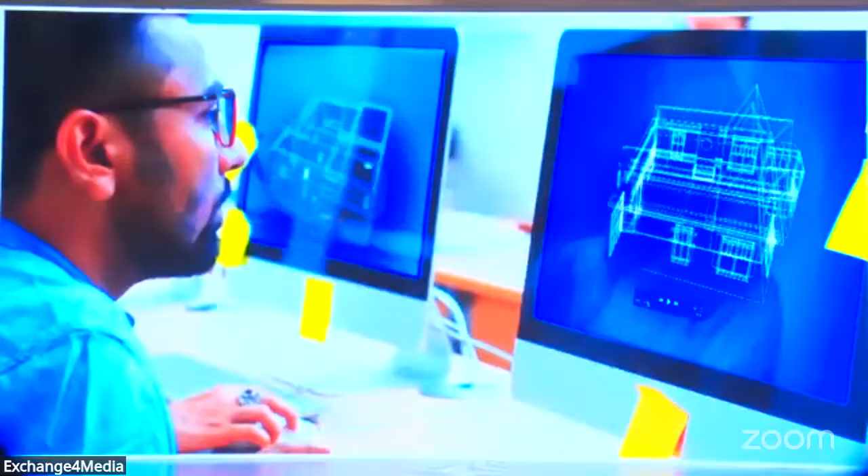As a country with the largest population in the world and an emerging superpower, India's development has been on a rapid rise. As with every growth story, this too is followed by unique challenges for the AEC industry. At Nemetschek, we have focused on the specific gaps and needs of the Indian market to create innovative software solutions.

As a global frontrunner focusing on the specific needs of the Indian market, we offer innovative software solutions that benefit every stakeholder for the entire AECO life cycle.

Several very prestigious projects in India were realized using Nemetschek solutions: Sangath Architect Studio, New Parliament Building, Abhikalpan Business Park, Rajkumari Ratnavati Girls School, Abhikalpan Skybay, Tagore Memorial Theatre, Ahmedabad Gufa.

As we shape the world in all dimensions, we have made it our mission to become the chosen and trusted partner of AECO and digital construction. Nemetschek is committed to delivering innovative solutions to meet every challenge and beyond. Be part of a new journey towards a better BIM solution, more cost-effective than your traditional tool.

Some people are born to show the world which path to choose in a crisis. Some brands are born to do the same. During times of challenge, the stalwarts of the Indian real estate industry have chosen to do just that, by showing others the way to finding opportunities even amidst a crisis, by showing the world how to go about delivering on promises even amidst adversity.

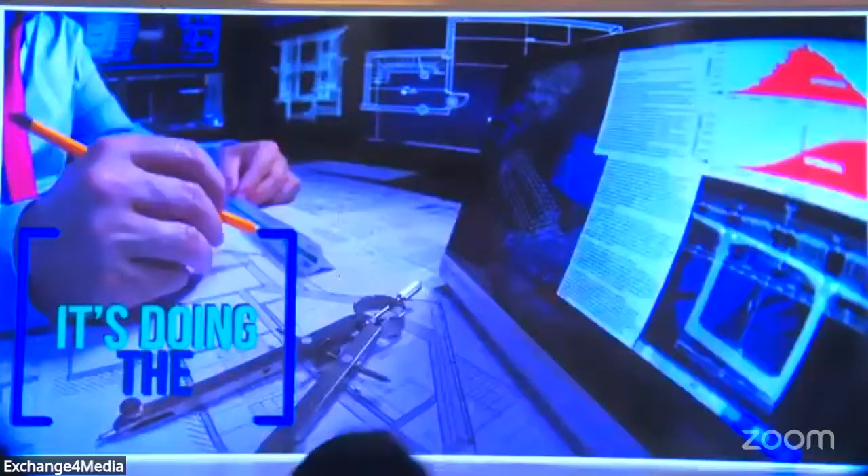Success doesn't just happen. It happens by design. By pushing the boundaries, by raising the bar. It takes days to develop a vision and nights to make it a reality. Knowing that pictures are worth 1,000 words and that every word makes a difference. It's doing the research, trusting your instinct, and finishing what you started.

For the past 20 years, Realty Plus has been turning obstacles into opportunities, keeping the industry informed on the latest developments, innovating to inspire debates and discussions, bringing forth the perspectives of industry leaders, honoring hard work and achievements, and keeping the industry connected.

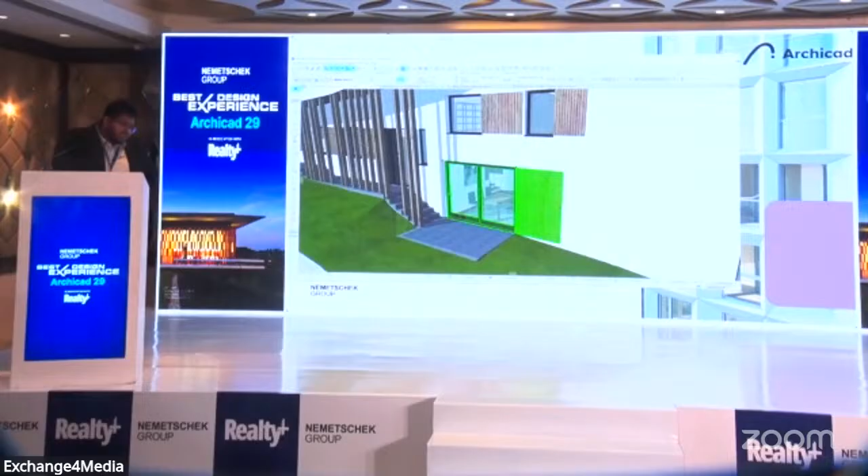To simply explain what Archicad is in a sentence, I would say it is a BIM authoring tool that helps us, the designers, architects, and engineers, create a model fed with all the information, and then we could use that model to extract the documentation we need, to collaborate with our team, internal or external, and produce data driven documents and collaboration. So that is where Archicad comes in, not just as a BIM authoring tool, but the best design tool out there.

I would say Archicad is BIM crafted by architects for architects. So what do we usually look for in a design tool today? We would like a software that will help us freely design something, that can help us visualize something, and importantly work in a collaborative environment with our teammates, and then document all these things. That is where Archicad comes in as a package, letting you do all of these things within the same environment, the same software. I'll be quickly diving into these four core pillars of a designer's workflow.

Archicad basically helps us design. It helps us tackle projects whatever the scale be—let it be a small residential project, or a high stacked project. That is where Archicad comes in with its strong user interface and intuitive guidelines, where people could quickly learn it, explore, and design, and that's where the user interface comes in handy.

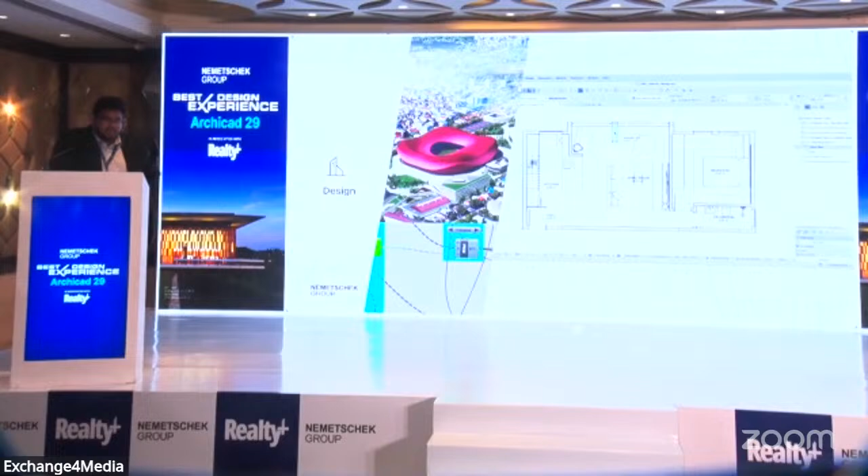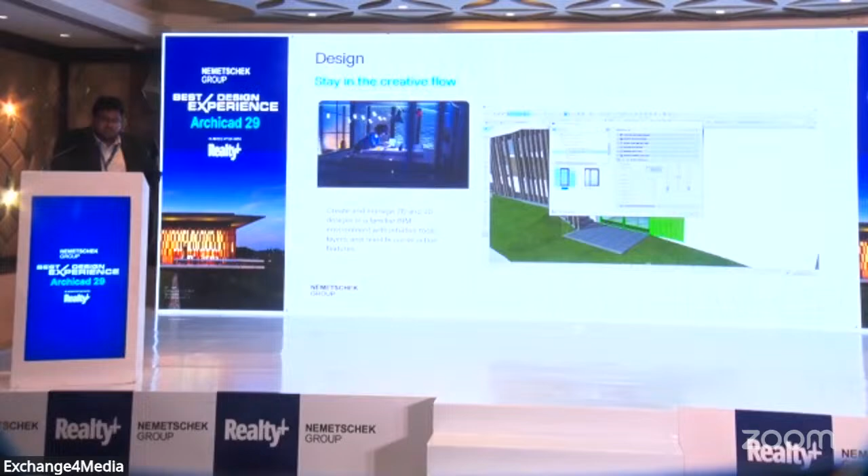Here we have the creative flow, where Archicad helps us create and manage 2D and 3D in one unanimous work environment, where we could simultaneously work on 2D and 3D, and design changes get reflected on both the spaces and onto the sheets we've exported, and the takeoffs we've taken from the drawing. This lets us focus more on the design aspects of our project, rather than jumping between views and changing designs here and there.

And there are tools like the curtain walls, the stair tools, the morph, and the shell tools. These tools help us create complex shapes, and help us bring our visions into life by modeling them. That is how Archicad also helps us create these complex elements.

We also have the collaboration between Rhino and Grasshopper to bring in some of the parametric part into Archicad. As we can see in today's design world, everything is parametric. We could see architects love learning parametric stuff—even during college, they learn Rhino and Grasshopper. So we Archicad people just thought, okay, you're good at it, let's bring that expertise into Archicad.

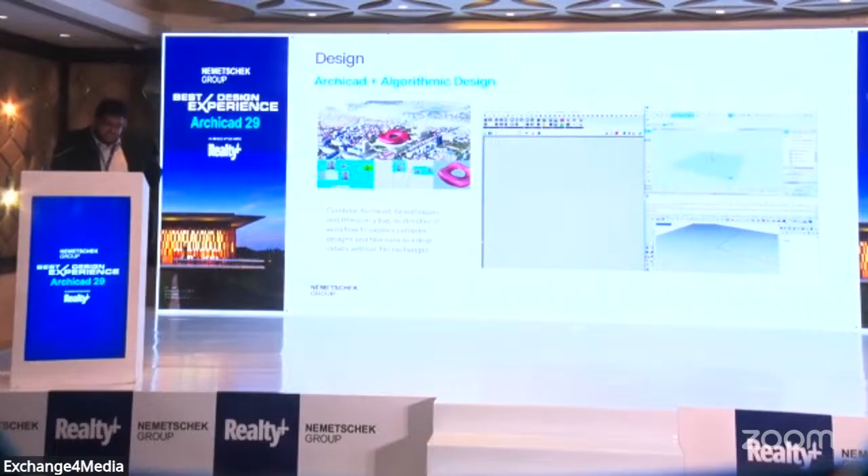So we have this plugin that lets you create complex shapes inside Rhino, and we use that plugin to convert those elements into BIM elements inside Archicad. This way you can have precision and control over your complicated shapes, and you can also get it parametric by controlling all these parameters.

One more design feature I would say is integrated design options. We all have this habit of creating multiple design options, naming them option number one, option number two, final one, and all that. That is where integrated design options comes in as a feature.

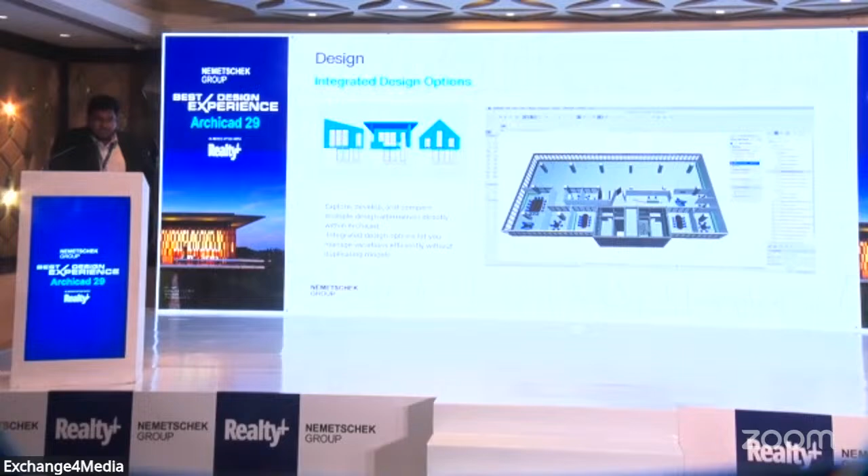I don't have to create duplicate files of all these different options, I could manage all these options within the same file itself. So I can have option A, option B, option C, and present it during my client presentation, and switch and juggle between these options. When the client goes with a certain option, we could delete all the other options and go with the final one. This helps us avoid juggling with different duplicated files and getting confused between ourselves about what we made in each of these files.

Let's move on to the visualization part. This is something very exciting for new users. Most of the softwares that we use today do not come with inbuilt rendering engines. So we start with a 2D workflow, bring it into a 3D software, build 3D structures, and then move on to another software to make renders of these things. That is where Archicad comes in with two inbuilt rendering engines.

One is Cinema 4D from Maxon, and one is Redshift. So you get the option to create your own renders based on these rendering engines. This will help you create your renders at the initial stage itself, while selecting your surfaces or materials, instead of having to go to your visualization team.

Archicad can also help you create certain animations and visualization aspects like walkthroughs and fly-throughs. You can simulate real-time sun path and shadow into your building just by giving in the latitude and longitude information. Archicad can simulate the real-time sun path into the site, and we can generate the shadows and the sun path through the openings in our buildings. This can again come in handy when we are trying to impress our clients, right? We just don't do walls and paint them, we do a lot of study before designing all these buildings.

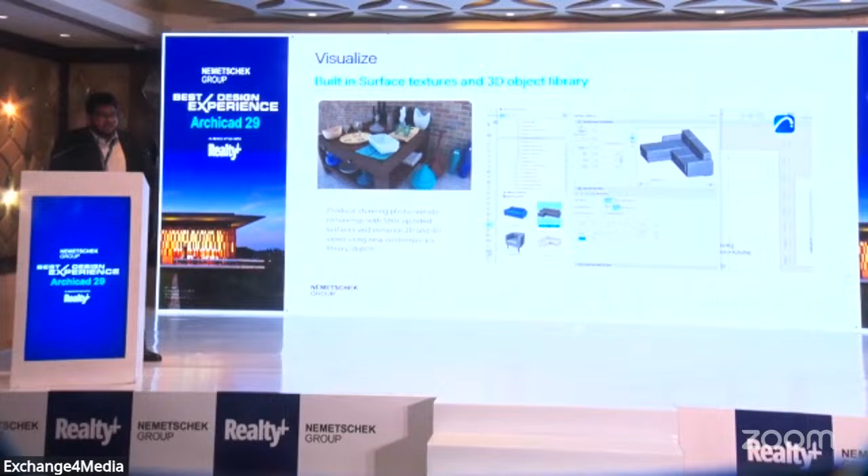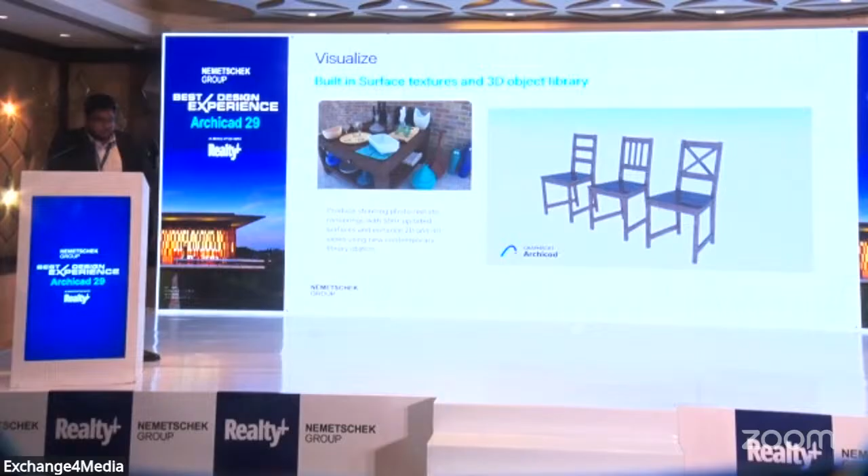We do have an inbuilt vast library of surfaces and parametric objects, and we could also bring in objects from any other 3D resources, like Rhino objects or SketchUp objects. But the objects inside Archicad I would call smart parametric objects. As you can see, these objects can be quickly adjusted, let's say a three-seater sofa made into a two-seater sofa or an L-shaped sofa just by adjusting these parameters. We can also create these objects by doing a little bit of GDL coding, and get all the elements within Archicad just by drag and dropping it inside.

We all like to work with the latest stuff on the internet today, like Enscape and D5. People are making realistic renders these days. When I was in college, I used to do Twinmotion, Lumion, it used to be so glossy, right? Now these softwares let you bring external elements into Archicad, and we all know the struggle of moving these elements inside rendering softwares. That is where with Enscape, you can bring all these elements into Archicad. It is bidirectional and live.

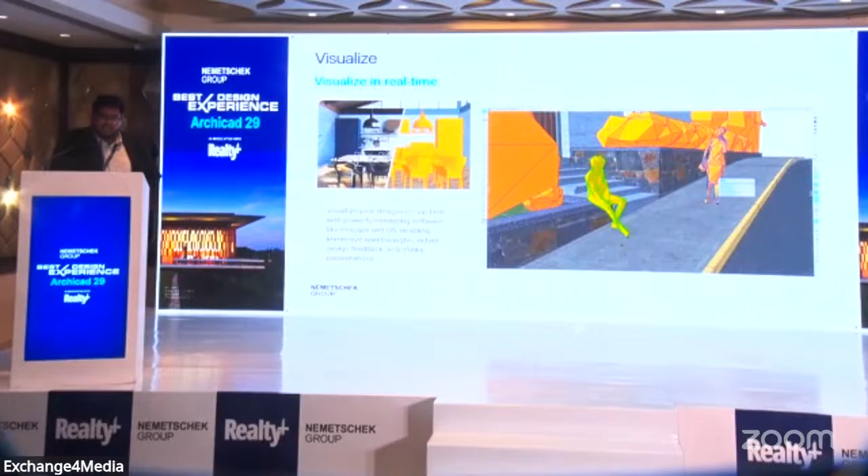For example, if we have a design team and a visualization team sitting in our own office, we could still connect it live, make those changes in design, and still get those renders. We don't have to export it, bring it back to the design team, and get another export. That kind of live rendering and walkthrough is possible with today's technologies like Enscape and D5.

BIMX is one of the greatest features, I would say, in the visualization part of Archicad. People use it for different purposes, but for me, I use BIMX to showcase my designs and brag about my designs with my friends. So BIMX I would call BIM on the go.

You can put your entire BIM project, your model, your documentation all together into a format called BIMX hypermodel, and then put the model into your smartphone and carry it everywhere. You can even put it on a cloud drive, share the link with your clients, and your clients can open that link on a browser and see your models, the sections, details, and all that you have generated.

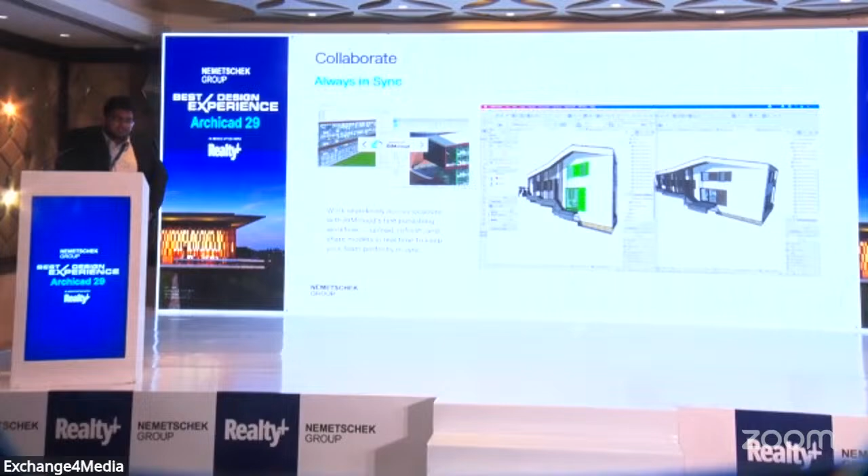Let's say if I am working away from my office, I'll download the file from the BIM Cloud, and then I'll start working from my personal computer.

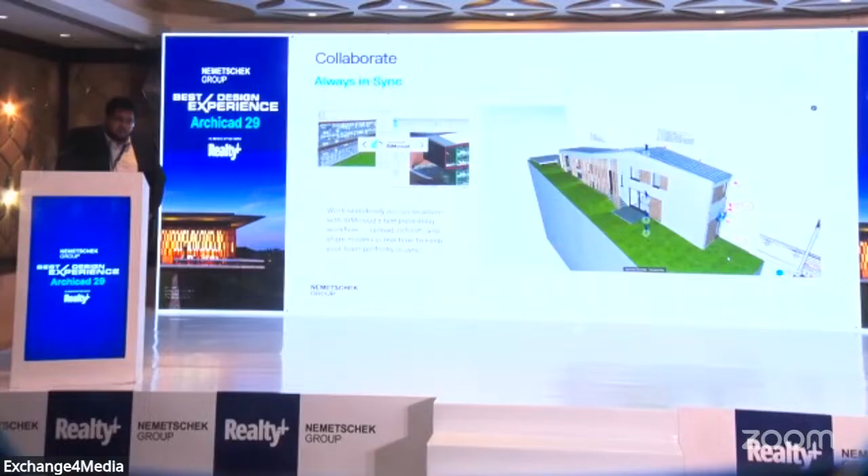There is one more function with BIM Cloud called Teamwork. I can share my project in BIM Cloud with my colleagues, so even if I'm not geographically in the same location with my team, I could still work on the same project with them at the same time. We can communicate within the file, and I can assign something to my colleague and ask him to change it or do it. So that is how BIM Cloud helps us with collaboration within internal teams as well as external teams.

And integration within Archicad. To talk about integration, Archicad can seamlessly work with some of the software I mentioned here. If you want to do certain clash detections or rule-based checkups, you can put it on Solibri, and then you can do all these things.

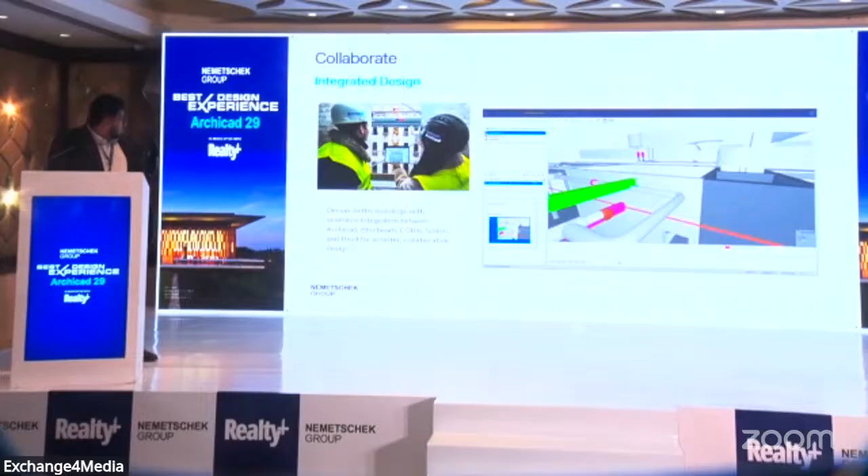If you want to collaborate your projects and push all your documents into Bluebeam, and if you want your team to sit and review those PDFs, you can push it into Bluebeam. And you can work with your partners who are working with Revit, bringing their Revit models in as reference. So that is how integration comes in as an internal part within Archicad.

More on integration, I'd like to talk a little bit about OpenBIM. To simply explain it, say I'm working on a Word document or an Excel document, and I want to share that file with a colleague or someone I'm collaborating with. I would share it in a format called PDF, because I don't want them to edit my Excel or Word file directly.

So IFC is the format where I would save my BIM model, and then share it with my colleagues, contractors, or consultants. They could use that IFC file as a reference to build their BIM model, whatever their preferred BIM software is — Archicad, Revit, Allplan, or Vectorworks. Then they'll give me back their IFC files, which I can link and use as a reference to build my own project. That is how IFC works within the OpenBIM concept.

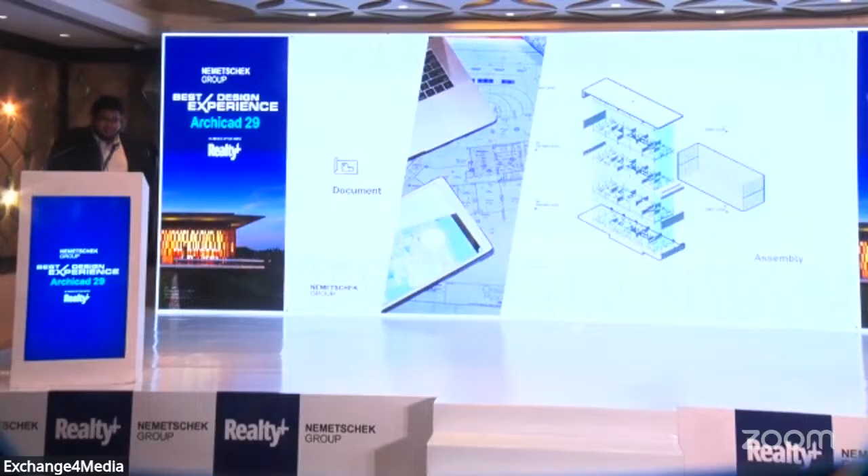And finally, the documentation part. I personally like to design a lot and hate the documentation part where you sit and create details and all that. That's where Archicad comes in and helps you focus on the design, taking care of the paperwork part of your drawings.

Within Archicad, we have this out-of-the-box documentation system. All these drawings are generated because we built a 3D model, and from that model we have fed in all the information. We cut that 3D model horizontally and vertically, which gives us the drawings—our sections, elevations, and plans. These sections and plans already have all the information because we fed it in while building the model.

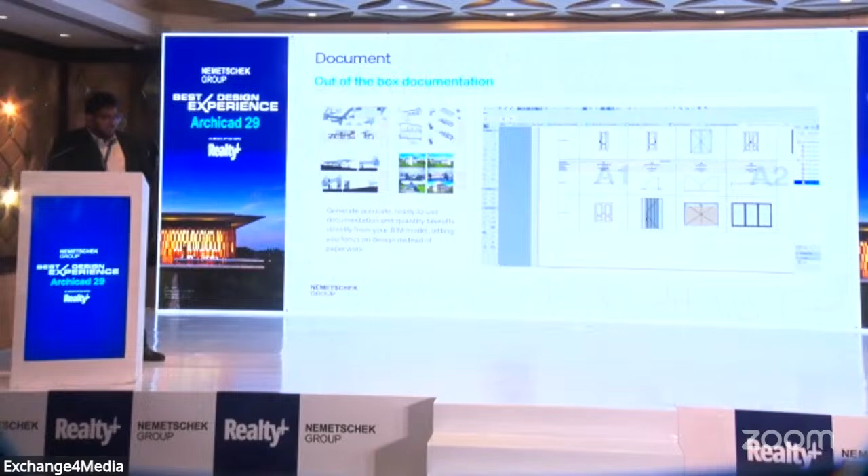I could quickly control these views by adding or adjusting my layers. I decide what I need in my view, then turn off the things I know I don't need. I also have more control with model view options—I can decide what level of detail I need in an element. For example, if I want to show just my door opening and not a door, I can do that without changing the door itself; I just switch the model view options. If I want to show a fully detailed door with the leaf and everything, I can switch it back without going to change the door setting. I can set all this up and then quickly juggle between options to create what I want to see in my drawing or documentation.

Once I create all the documentation, I put it on sheets and just click publish. With a single click, all these drawings get extracted into the desired format—let it be PDF or DWG. With that single click, all the drawings go and sit in the folder we've created, or we could even put it directly on the cloud. We can do all these things here.

The main part is when there's a design change—I make changes on the design, then come back to the publisher set and click update, and all the changes I've made get automatically updated on the documentation. That's where most of the time saving happens.

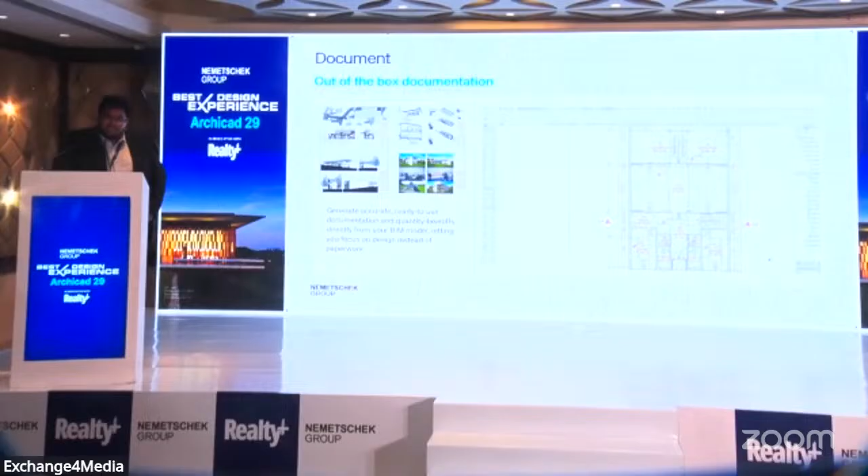To talk about accuracy and credibility, since most of the information is already fed in, if I want to give annotations, I don't have to label my wall as a wall, because Archicad already knows it's a wall—that's how I made it. I click on label, then click on my wall, and it creates: this is wall number 1, this is the material it's made of, and all the information I wanted on that label is there. It also works with levels, annotations, and dimensions. Since it's built up this way, I just click all the points and drag, and my annotations are done.

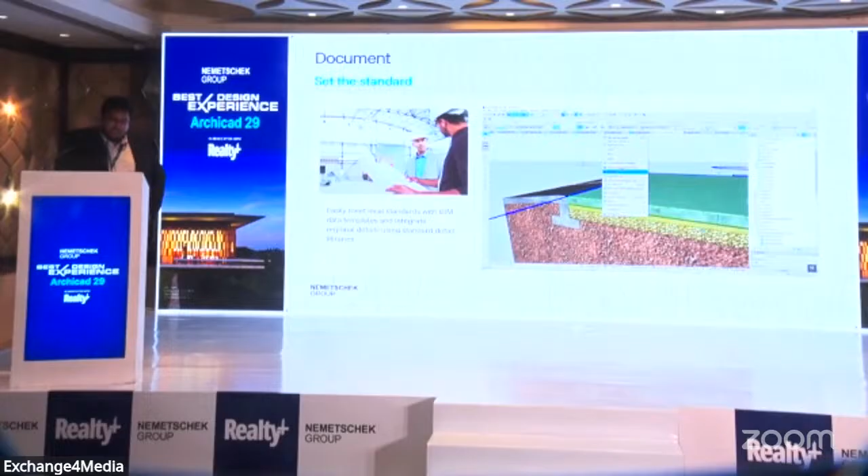Again, setting up the standard with documentation—some of this might sound like a lot of settings here and there, and it is, that's how BIM works. Once we do all these settings, we can put all of this into a template and use it across all our other projects. Once we're done with a project, having made a lot of changes to design elements and annotations—because every architecture firm has a standard, a drawing template, an office standard—we can put all these things into the Archicad template and throw it onto different projects, then straight away start working once the template is created.

There's supposed to be a nice music playing along. It's okay.

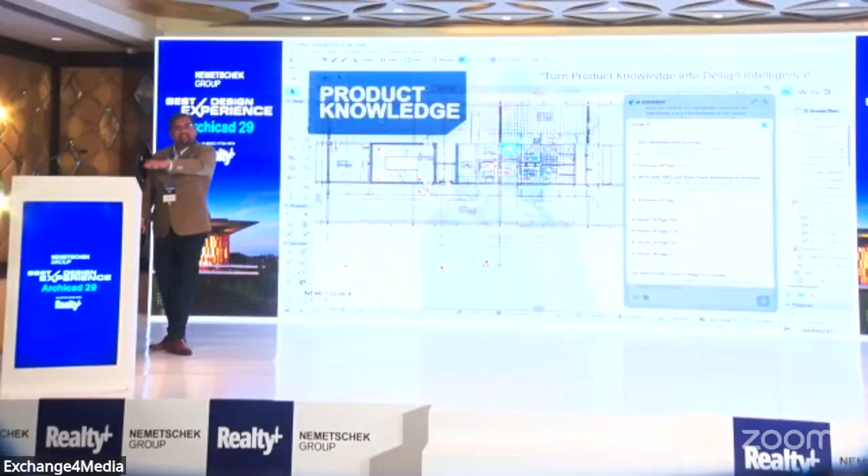So all your queries can solve instantly. You're gonna have all those features inbuilt inside your software. I know architects work late, and they want something at 2-3 a.m. We built a friend for you which can at least give you some answers, immediate response through an AI system. It's inbuilt inside, so it knows your product knowledge, and you can deep dive into that.

Second thing is your readability check. It's always difficult - we are humans, we tend to make mistakes. Often there is an overlap, like if you add a dimension, it automatically overlaps with the text. You can actually proof check this through your AI assistant. We want your creativity to focus on building your own designs, your aspects, your design thinking. Let the AI system worry about the documentation.

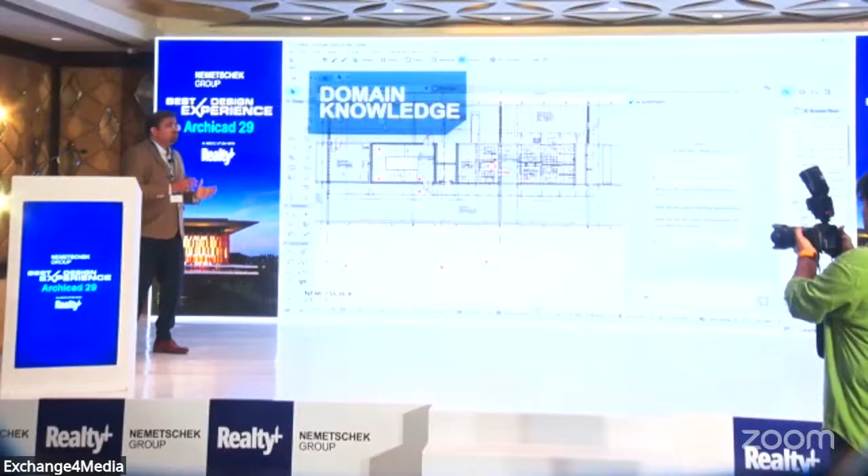Then domain knowledge - it knows your whole domain, like regulations, minimum space required for fire norms, all this. Why do you need to switch to a different Google? You can directly ask it. There is a Gemini engine inside here which can give you more exact insight about what you want.

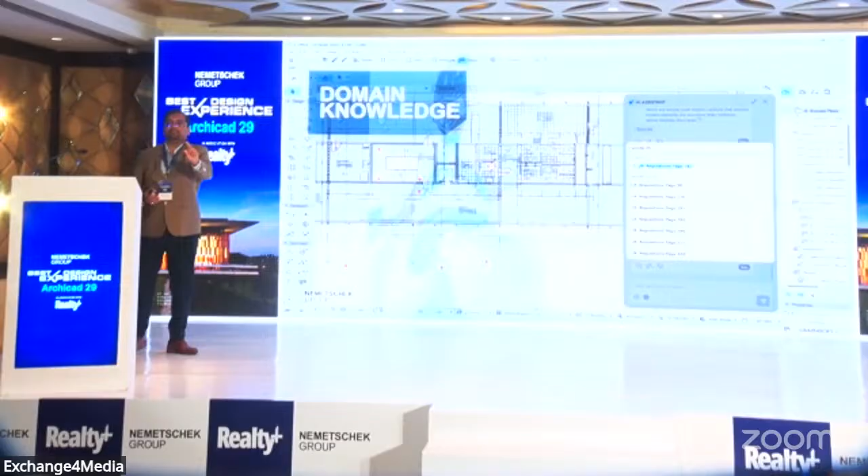So while designing, we are trying to change the whole design concept where data-driven design can also work. You always get this question like, how much should I have this, am I having this? Let's have a cross check with this. Let AI assistant help you in that. So you build it right, precise, smarter, deeper, bolder.

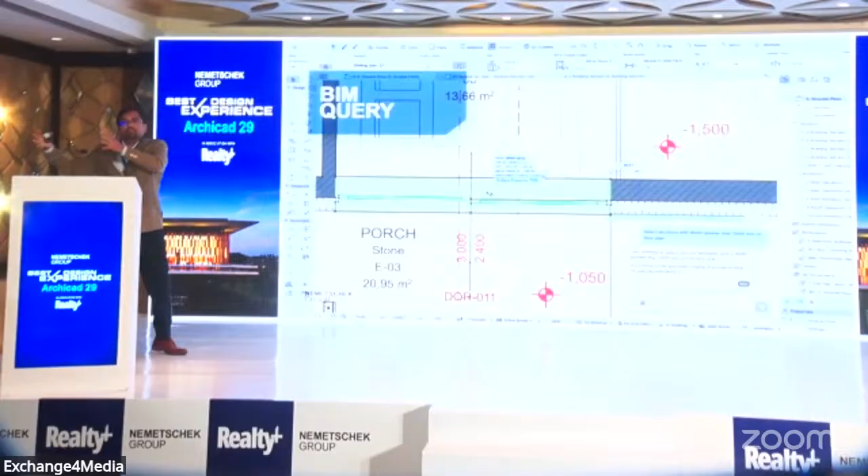Then BIM queries - you tend to get queries like, how many doors do I have, with so much and so much dimension. You're gonna ask it, and it will give it to you. When we say BIM, the 'I' is very important - information is very crucial, and you can literally play with that.

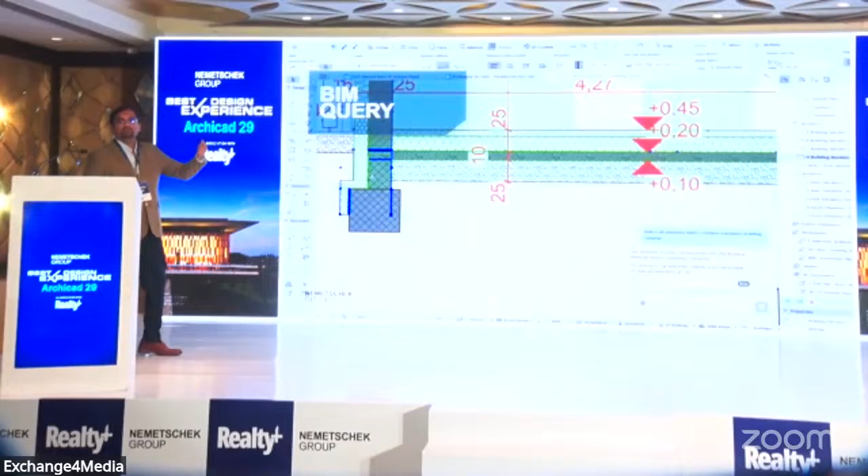Build your model, play with your information. So tomorrow, if a client asks you a question, you can immediately answer precisely, instantly, directly. That's what the AI assistant does for you. That's why we are building a new ecosystem, a cutting edge innovation, so that you get the best design experience.

AI visualizer - you already know that, you already explored that. Instantly it gives you at least 10 different options, and you can choose from those to work on your design. So it already saves you time, but now AI assistant and AI visualizer are combined together. Just add your prompt, say 'I am visualizing this' or 'I want this visualization,' and it will give you instant results, saving a lot of time.

With a client you need to discuss something you don't know yet - as architects, designers, engineers, you don't know what you're building or how. So you can build a very early stage design, maybe through AI, then verify it, and then further precisely do the documentation for it. Saves your time, right?

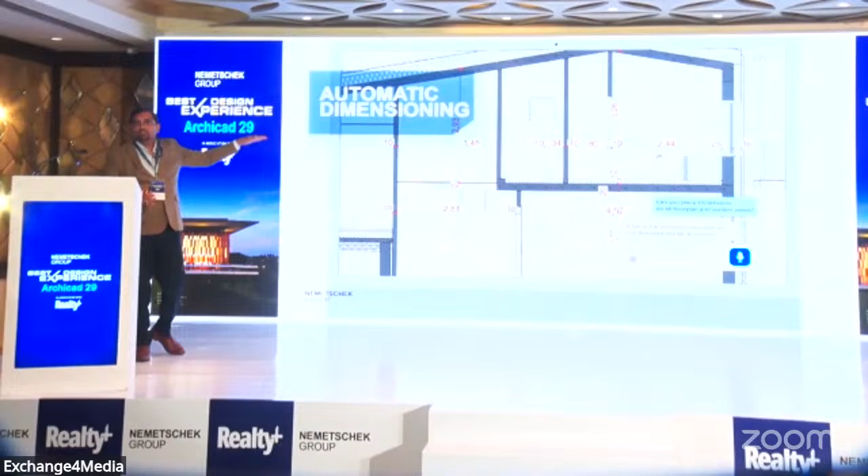Then there are precise documentation tools, where through the AI assistant you can ask for auto dimension. Just say dimension the floor, or dimension a certain part of it, and it will do the dimension for you. So you can focus on your own concept, your creativity, your space requirements, and all those things - focus on designing the best experience.

Even labeling is sometimes a very painful job - you have to make sure you label it right there or not. So you can also add smart labeling tools and work along with your own design concepts. Leave the documentation to the AI assistant. This is still a beta version, and going forward it's going to get better, letting you work much faster, much better, and exactly how you intended for your client.

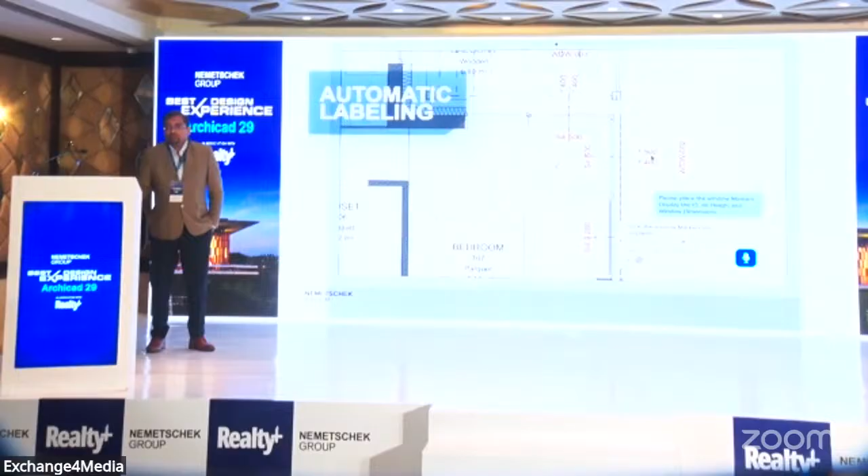So as we've covered the AI tools, I'm going to talk about some of the new standalone licenses which we have started - the MEP designer.

We thought that when we say designers, the MEP part is still missing. With this 29 MEP Designer launch, you can now start complete design of the whole MEP systems - your ducting, your piping, all part of it. You can build it here, and not just like building in CAD software - this is more intuitive sketching, same like the Archicad experience you had, inside your software, and you can just build it, sketch it. Even Mac users can now be MEP designers, and I think this is a big leap, right?

Architects used to enjoy that Mac feel and working on that. Why not MEP designers? Now you're going to have it. So I think this is one of the great leaps which we're going to have, and I'm going to quickly show you a video, and then we're going to discuss more into those features as well. Let me play the video.

Hope the music will work. Yeah, it's working.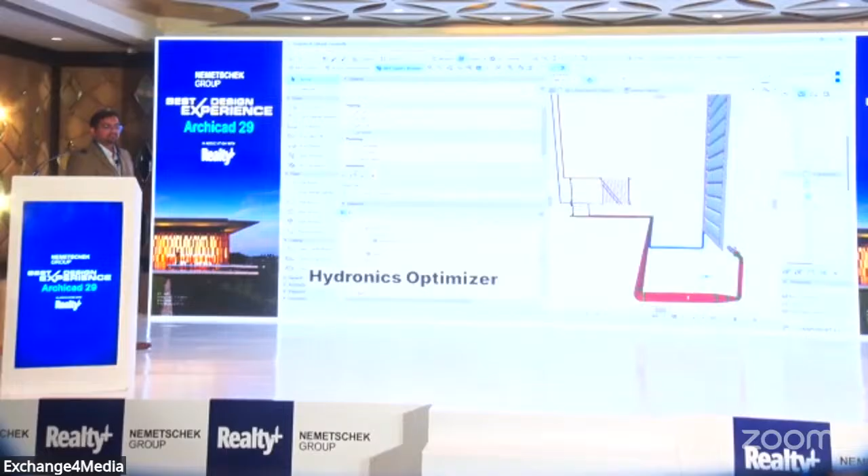Hope you liked it. So all this experience which you saw, like what you do build in Archicad, you're going to have it inside the MEP designer, and that's a standalone license for the MEP users and all those things. So let's deep dive into each feature.

So it's a powerful, effortless MEP modeling which you can do, where you can draw all your piping, ducting, all fire requirements, however like a sketch - intuitive sketching in 2D and 3D, and that's effective enough. However you draw it in Archicad, just follow the command and it will follow it. You can even do clash detection and collision detection inside this, where while designing in your early stage, you can find out, okay, among the fire and among the duct, how you can coordinate among there as well.

So it's early stage quick clash detection, as well as there's direct integration with Solibri, so that you can find detailed clash detection and a BCF tool, collaboration platform together as well. So it's powerful clash detection in early stage, as well as effortless modeling in MEP in all kinds of systems. We believe MEP is more like breathing for the building, and that's what we are providing - an intuitive software solution for them as well.

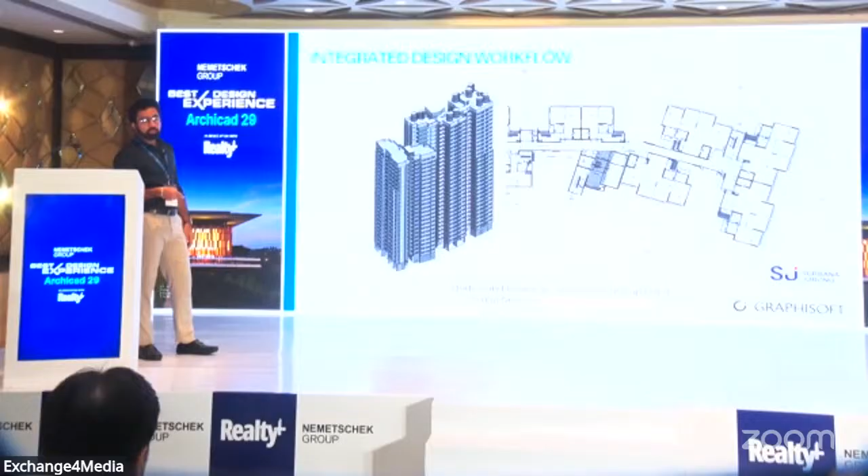The documentation for all the disciplines is live, as I told earlier, so it's a single source of truth. Whatever changes you make in any of the models, documentation in the other disciplines also gets updated.

As mentioned in the previous presentation, BIM Cloud allows you to work from anywhere. So you can have team members joining from anywhere around the world on the teamwork project and collaborating together. This opens up the opportunity of working with architects from other countries as well.

For coordination, if there are any issues within the model, the modelers will be able to spot it in real time and send a message across to the team members responsible for resolving those issues. So there is no separate coordination that needs to be done—it can be done while modeling, by the modelers themselves. So there is no coordinator required in this workflow.

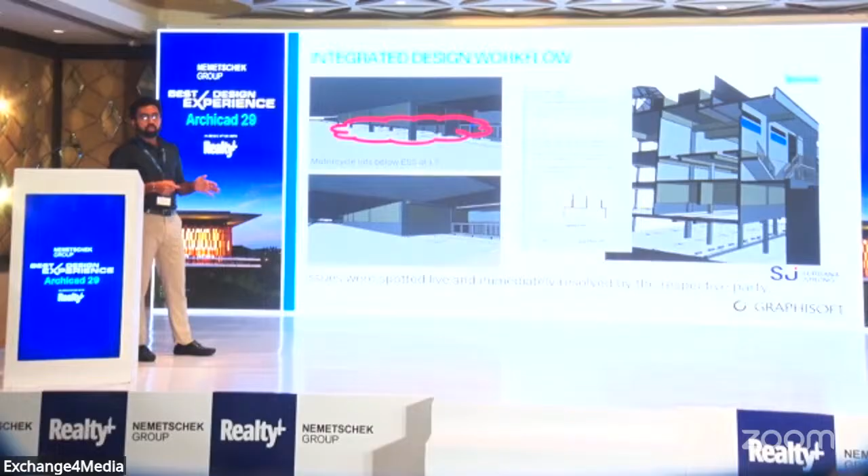Having seen the advantages of this workflow, I'm going to show the timeline required for the traditional workflow. The architectural team starts the modeling, and after a point the C&S team, the civil and structural team, gets that file and starts their modeling. After another set of time, the MEP engineering team joins and creates their modeling. During this tender stage, coordination happens all the way across, and they generate this federated model until the issues are resolved.

But with this new one integrated model approach, the architectural and structural team work on the same model right from the beginning, and coordination happens in parallel along with the modeling by the modelers. After a point, the file can be linked to the MEP model, so the MEP engineering team can develop their model, and their coordination also happens in parallel while they do the modeling. So there is no separate coordination happening, and the resource for the coordinator is also exempted in this workflow.

So this saves almost two months of time for a multi-story building project for Surbana Jurong. This is actually the result of a case study that we did together with Surbana Jurong.

We also have TeamBuild Construction, which is also using Archicad. The earlier Surbana Jurong was a design consultant, and TeamBuild is actually a construction company. They have also adopted the same workflow during the construction stage of their project. They have Archicad for architectural, structural, and MEP, but they are producing drawings for the construction stage.

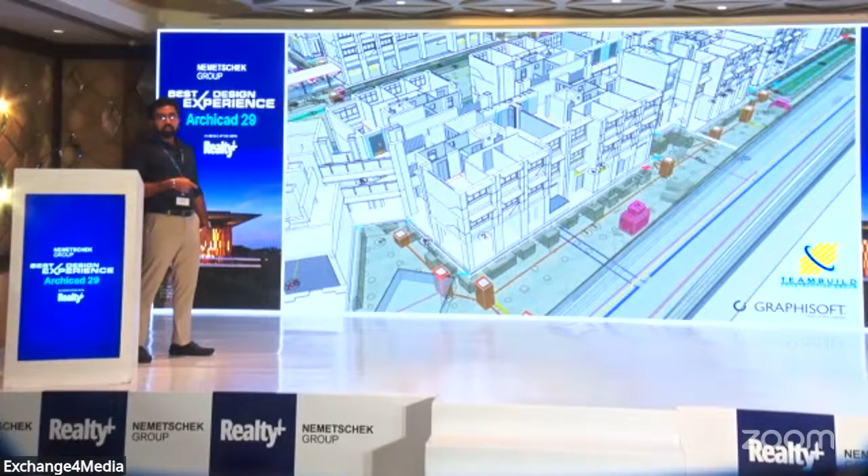There are manholes, inspection chambers, civil works - everything being done within the same Archicad file, and they are able to produce documentation at the construction level detail within Archicad. They are using the same approach where architectural and structural teams work on the same file, and then this file is linked to the MEP project, and then the MEP model is created.

They are able to publish their work in Enscape as a virtual mockup. Back in the day, if they do HDB projects in Singapore, they have to create a real mockup so that it will be displayed in the HDB office, so buyers can come in and view the mockup and then buy it. But now what they are doing is they have moved digitally.

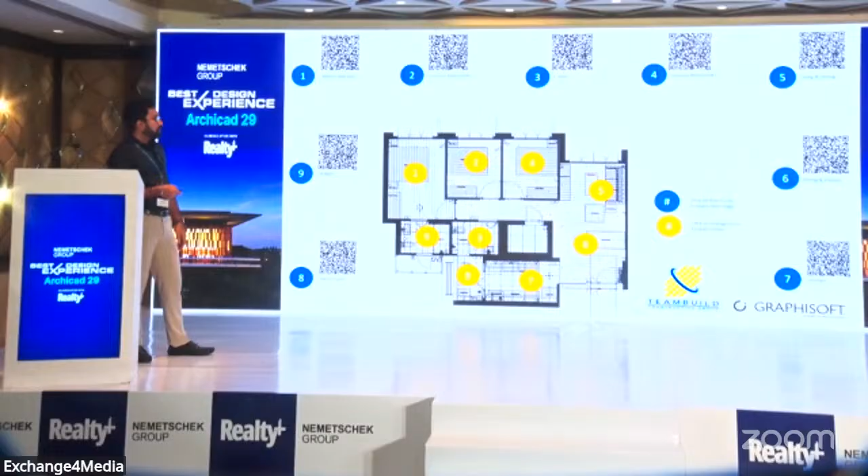They have exported the Archicad project into Enscape, and then they are able to view it on their mobile phone. Here I'm showing this QR code - if you scan it, you will be able to go inside the model and check the details of information that they have put inside the models there. I'll pause here for a few seconds. If you are not scanning, I'll also show the video of what it will be in the next slide.

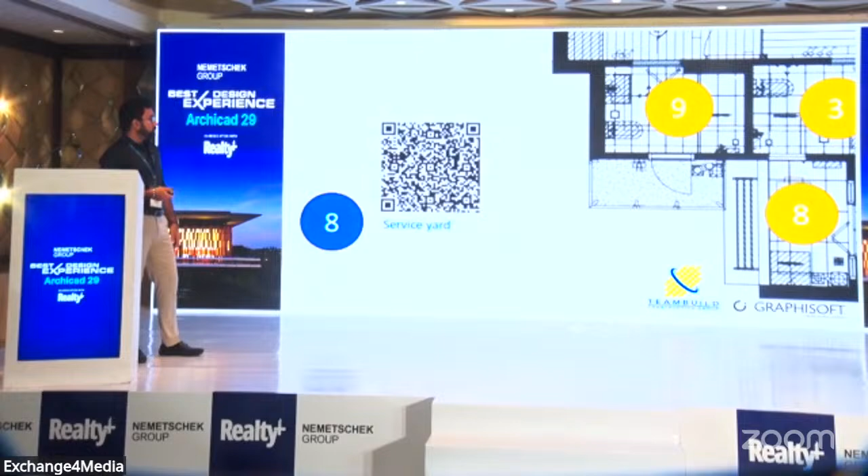Once you scan this QR code, it will ask you to allow access to the gyroscope. If your mobile phone has a gyroscope, the motion sensor, you'll be able to allow it, and then you can go inside the model. You can see the detail of information that they have put inside the model. They have done the markups, the markings of dimensions in 3D itself, and they have also modeled all the MEP tools to the greatest detail. You can see even the furnishing, lighting - everything is there.

If you closely watch these tiles here, they have even drawn or created the 1 mm groove between the tiles. That is how detailed they have made the drawings and the model. So Archicad is able to support all these workflows natively.

Having seen the one integrated model approach, let us take a look at data-driven design. For data-driven design, we are using dRofus, and then we are also using BIMx. I'll show how BIMx helps in accessing the information from dRofus. For people who are new to dRofus, I'll give a short explanation of what it is.

dRofus is a data management tool, meaning it is kind of a database where you can plan all the design requirements. If you're meeting the client for the first time, you can add all the specifications that they give into this digital tool, which helps you do the design. This is a planning tool where you have all the design details, specifications, and requirements captured within this environment, and this has a direct connection with Archicad. You will be able to use this information inside Archicad to complete your design. Anytime you'll be able to create your room data sheet.

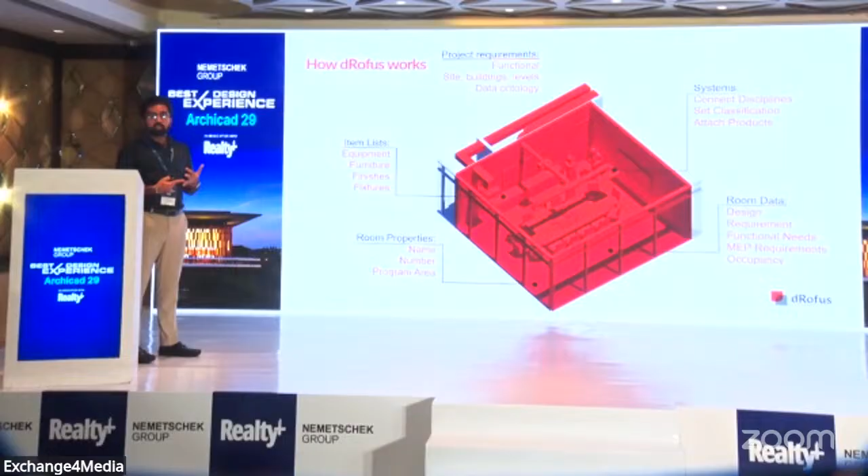So if there is any room, say for example for this stadium, we can plan how many projectors you want to place, how many chairs you want to put in, how many doors you want to have, what are the sizes of the doors. If it's a projector, who is the supplier, what's the price, the specifications, PDF, everything could be uploaded into this platform, and then this could be used during the design to plan and decide accordingly.

You can produce reports out of it anytime, which has the cost data, who is responsible, and how far the construction has gone. Everything could be managed from this platform together with the BIM authoring tool, which is Archicad for today.

As you see here, you can have the room information, the area required for this room, and the list of items you want to put in, as I told earlier. This dRofus tool is very useful for projects like healthcare. If it's an ICU room, you have a set of equipment you'd like to have across all the projects, so all that could be captured within this platform and used to design or plan accordingly in the BIM authoring tool.

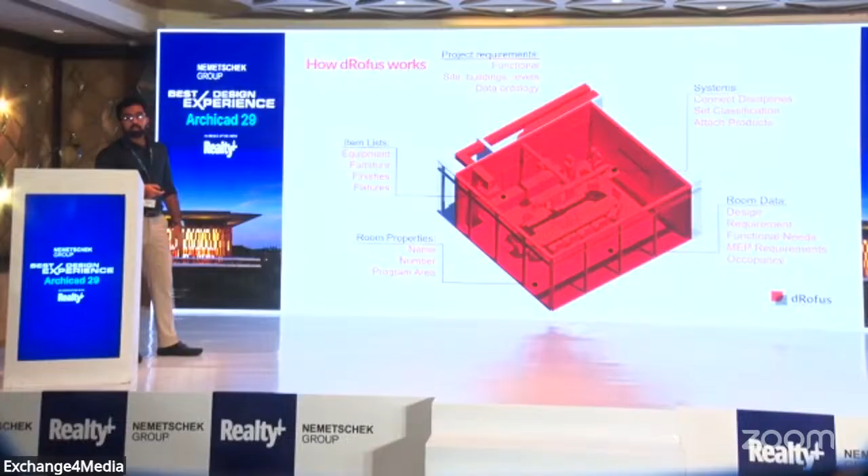And it can also be used for institutional projects, hotels, and so on.

So here is a video showing how it is. On the left side, you can see we can create templates. Let me play this video.

First, you can create templates of each room that you would design in your projects. Say for example, we have this office 50 square meter, office 25 square meter. So you can create all these templates. For this auditorium, in this case, you can have a template of it as well.

Inside there, you can put all the details. You can even put the link of BIMX files, documents, the equipment you want to place inside, the quantities of those equipment, what's the budget price, who is responsible for that. Everything can be captured inside with a user interface. The doors and windows, services, packages, structural elements, finishes, everything could be captured within as a template.

Once this template has been created, you can use this room across multiple projects. That's why I say this is more useful for repetitive projects like healthcare and so on. After that, you can have a database of all the equipment, furniture, doors, and other structural elements as well.

If you see here for this flat screen TV, you can capture the price, who is responsible for this, and then add images of those from the BIM model or real images, or even add the PDF manual of that particular TV. So for this you can create a database of all the equipment, doors and finishes, structural elements that you would be using on your project, so it can be used across multiple projects.

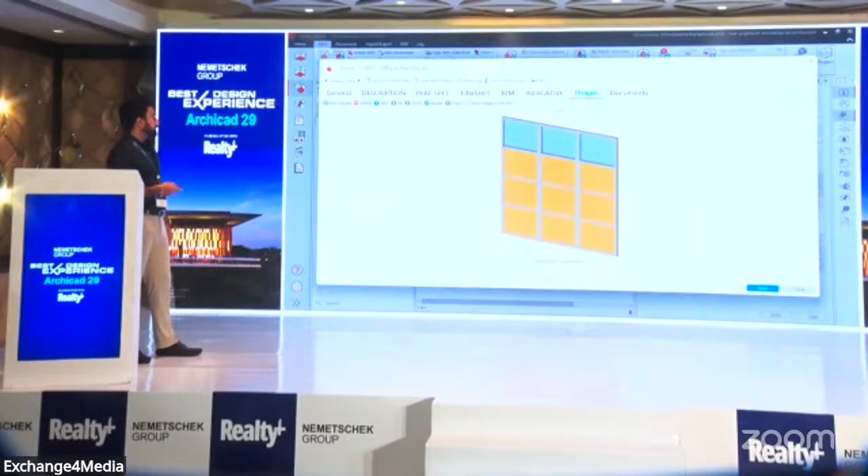Here is the example of office partition. Similarly, you could create databases for services as well, capturing all the services you would use on the projects, and you could also have documents as a database, uploading all the documents related to your design within this.

And here is where you design your project. Say for example, here I'm showing two projects: one is stack tower, the other is the structural model project, and I've designed only one level for the demo purpose. You can see there's a lift lobby, office 25 square meter, and office 50 square meter, and inside that you can plan all the equipment and devices you want to place. So the details of all that are already captured - this is kind of a database of what you're going to design with a user interface.

As you select any element, you can see you can add custom data as well. Say for example, here I have added progress monitoring data like fabrication status, and also QA/QC inspection. So this kind of custom properties as placeholders can be created in dRofus, so that as the project is ongoing, you'd be able to capture the information and use it for decision making.

And then you can produce reports anytime. There are multiple default report templates already available from dRofus, but if you want to customize it and create it in your company template, you could do that as well.

So it produces a nice PDF with all the reports that you would want to generate from dRofus anytime. Having seen that, this looks something like a very nice database with some UI to produce reports. So you could always think that you can do it with Excel actually, put all the information on an Excel and generate reports from it. That is quite easy to do.

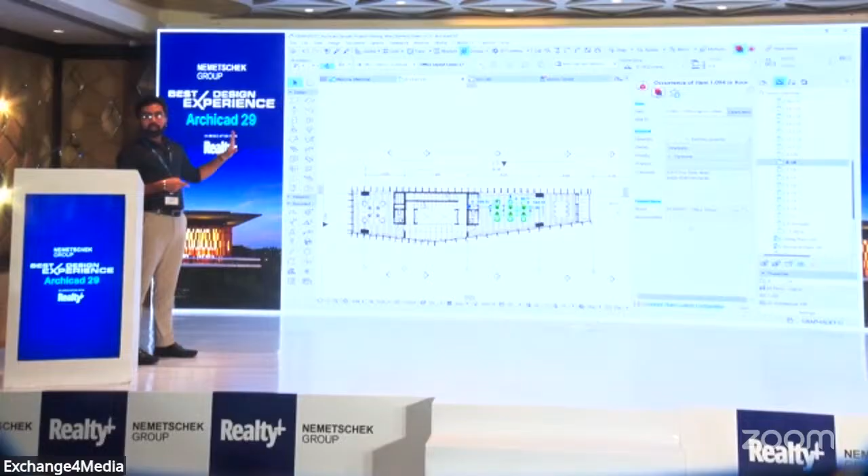Of course I've done some background work, creating a template of what I already have inside dRofus, so it's a one-time process. Once you have created the template, then once you sync the project, everything will get recognized automatically, and then you can just add information to it.

For example, if you are designing a room and you have planned for all these equipments, it will always recognize what has been designed in that — design meaning what you have placed inside the model. If there are discrepancies, say this office cabinet I have planned for but not placed inside my design, when I click update Archicad, this add-on will recognize the element and place it inside this room.

So you can see it already becomes 2 there. But of course it will place it randomly inside the room somewhere, so you just have to move it and put it nicely in the right location. Here you can see it's placed at the center of this room, and you just have to move it and place it onto the sides.

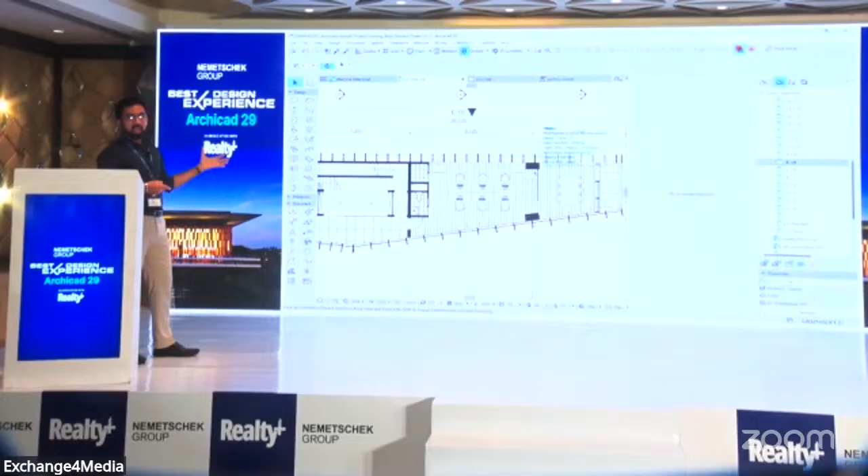So this helps to plan and design accordingly — what exactly needs to be planned inside this room, what could be the size of this room — everything could be planned and you can design accordingly.

Similarly, I have an example of this structural element, which is the wall. You can see this progress monitoring data — you can anytime capture this data if the project is ongoing.

So this is how the authoring tool could work together with the dRofus data management tool, so that you can nicely plan and design your project and then produce reports so that you could do decision making at the right time with all this data.

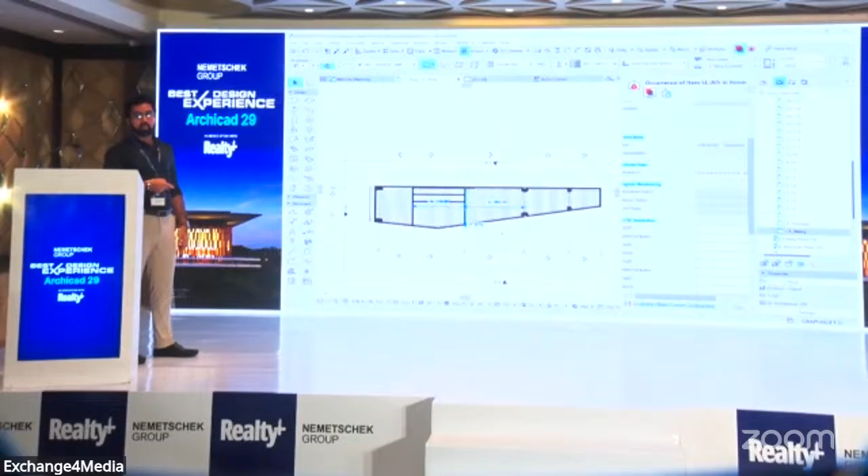Having seen that, I wanted to push this integration to BIMX level, meaning I wanted to access the dRofus information on BIMX. So what I did is I developed some Python script. There is no default or off-the-shelf connection available for BIMX with dRofus, so we developed a very simple Python script which can be used across all projects — you need not write a Python script every time. With that script, we developed an extension in BIMX.

Let me just play this video. You just have to load the extension first. Once the extension has been loaded, you will be able to access the dRofus information, just similar to what we did in Archicad, from the BIMX element. I'm just opening a 3D view here.

Once you've loaded the extension, you can just select the element and then go to the element pop-up menu, and from there you have this new menu called 'open occurrence in dRofus.' Once you click that, you will be able to access all the information of that particular equipment from dRofus. So why is this integration needed?

For people working in construction sites, they can just have their mobile device or an iPad, so that they can access both the model data coming from Archicad and also the planning data that comes from dRofus together in one place.

So this gives a 3D context to the 2D data. Imagine if you just have 2D data, you have to go by row and then find out. But from the 3D environment, it is always easy to access the information.

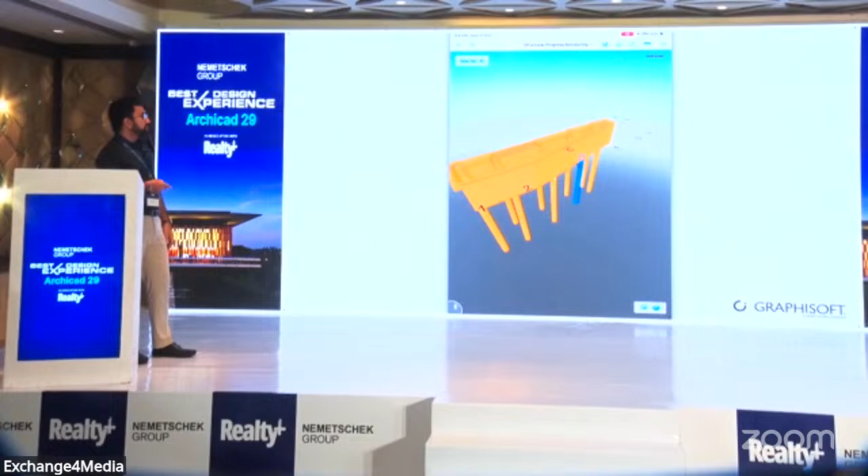You can access this information from Archicad also, and also on dRofus web, and so on and so forth. So I'm showing the statuses of different work status, delivery status, and so on. Everything you will be able to access. So this could act as a dashboard for the project to see visually in 3D and also in 2D. That is how the BIMX API would help you push further to access the information.

That is why earlier during the first slide of my presentation, I was telling BIMX is a data access tool rather than it being a visualization tool.

I will also show another example of a BIMX extension here, where we could perform hot desking seat reservation within the BIMX environment. You can see we just click check hot desking availability, then key in the start time and end time of your reservation for the seats available on the model, and it gives the status of each seat that we have.

The first one that shows red in color is reserved, the rest are all free. You will be able to select the seats and then click reserve seat. This will automatically get the time that you have used for checking, and for security reasons you just have to log in and then click submit, so that the seat will be reserved.

So if anybody else checks on the same time slot for availability, it will show red in color showing that the seat is reserved. So BIMX is not just a visualization tool, it can also be pushed further to use it as a digital twin by capturing information from different databases or from different IoT devices, and you can visualize it here.

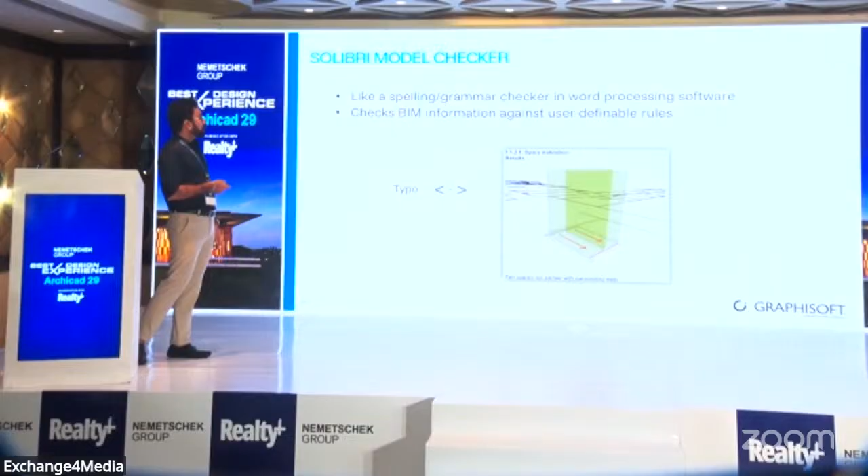There's a famous saying which says use a mouse instead of a jackhammer. So just use Solibri at the design stage to find out all the design issues, so that you're not resolving those issues during the construction stage using the hammer.

Here are some examples of issues that you could identify from Solibri. Of course, these are not exhaustive—there are other issues you can identify as well, but I'm just showing a very small set of examples.

This example is the component overlapping or duplicate components. If they are from the same discipline and there are components overlapping, it will highlight that within just a few minutes. Then the space modeling—this is the same example I showed earlier—if the walls are updated and the zones are not, it will visually show you the results.

Then the space schedule. If you're creating a space programming rule where you have a target area for each room you want to design, with a tolerance, it will identify if the requirement is not met. For example, if you're going beyond this tolerance area, it will highlight it for you as an issue.

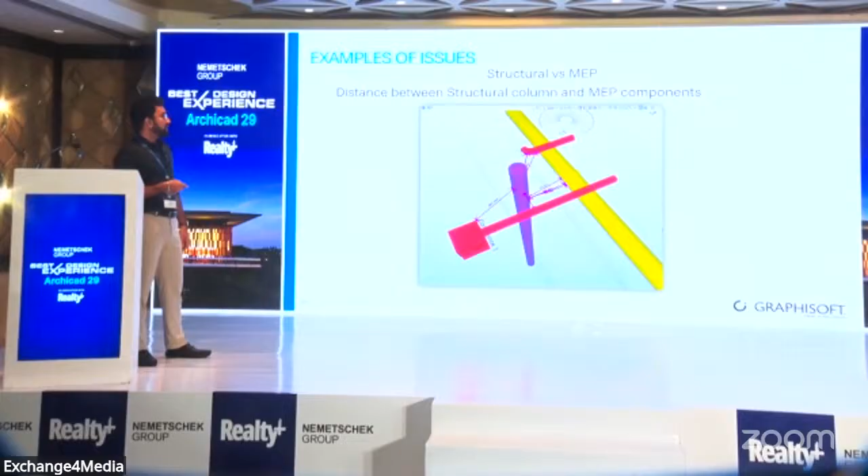Then the integrity between structural and MEP. If you want to maintain a certain distance between the structural element and the MEP elements, it will help you find out whether the elements are far enough from the structural elements.

As I said, there are multiple other issues you can resolve—for example, the fire access exit—all that could be checked with Solibri and you can find the results.

The good thing is it gives the issues visually, so you'll be able to visually see exactly what's going on. In this case, you can see it isolates all the other elements—it removes them from the view and just isolates this element for you, and it also creates this visualization to help you resolve the issues. So if you're a coordinator, you can just take a screenshot of this and send it to the modelers, and they'll be able to easily resolve it.

So let me explain the workflow of Solibri model checker. If you have an architectural model, you can export an IFC from it. Solibri is an IFC based tool, so you can bring in IFC from any authoring tool and load it inside Solibri, and it becomes a Solibri model. Inside that model, you can perform all this automated analysis processes.

You can perform visual checks, you can check for integrity and quality between the disciplines, you can run space programs, you can check for building codes or local codal requirements, you can do best practices checks, and you can also do a reliable quantity takeoff.

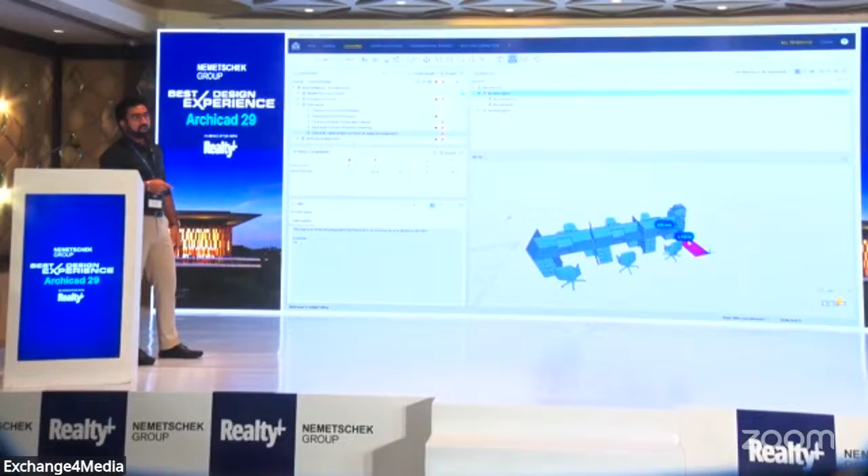So this is one such rule that we developed from scratch for Land Transport Authority, Singapore. You can see here it is checking for obstruction all around this object, and then if there is any obstruction nearby, it will give you the results there. And you can see I can just create the issue right away from there by just right clicking and add, and it adds all the information of this issue automatically, including the screenshot and the elements involved in this issue.

Everything has been automatically added to the issue by Solibri itself. I'm not doing anything, I just run the check and then it creates the issue. It automatically adds all the information for this issue.

So if you want to add more screenshots, comments, or information like priority, stage, or who is responsible to fix this issue, all that could be added in this issue. Here I'm trying to add a comment for the modelers to resolve this issue.

So I'm writing, please move the printer aside. And you can see the location, which is level 9, is also automatically captured. I'm not keying that in.

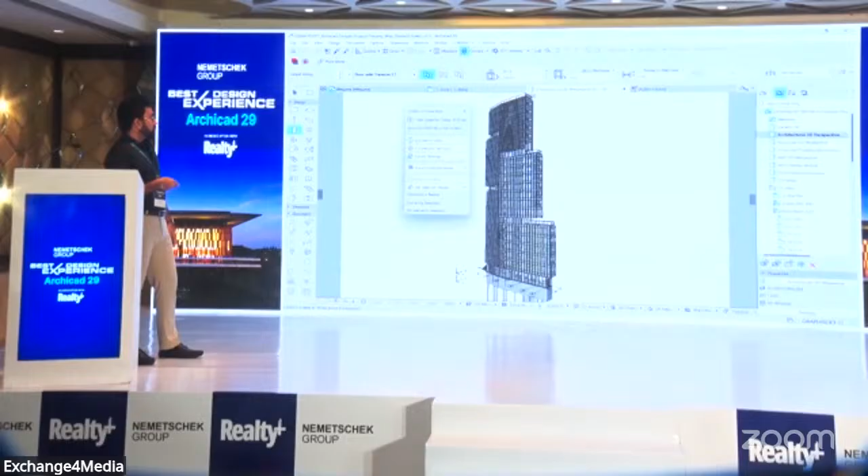Now you can go back to Archicad and import the selected issues from Solibri, then open the issue organizer inside Archicad and load the issue there. As soon as you open the issue, you can see the view of that particular issue is already there, the screenshot, and it also selects the elements involved in this issue. You can also see the comments that I added inside Solibri.

So if I'm a coordinator, I can just push the issue inside Archicad. The modelers will be able to log in to their teamwork file, check out the reason for this issue, and then resolve it.

And the best part, just now I was double clicking this view and it isolated the elements for me, similar to what we had in Solibri.

If it's a full model and you have to navigate and find this element yourself, it's very difficult, right? So you just double click the view and it automatically isolates the other elements, giving you these two elements to resolve this issue. It's that easy.

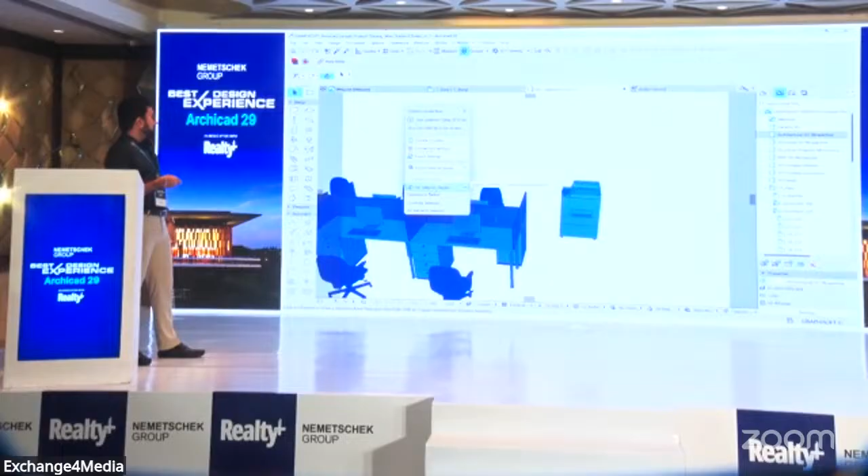And then you can also bring selection from Solibri if you want. So you can select a few elements there and then get the selection basket, so the selection from Solibri gets highlighted here in Archicad for you.

Having seen that, let's move on to the next workflow, which is collaboration with Bluebeam. With Archicad 29, we have a new plugin that will publish your Archicad drawings into Bluebeam Studio, where you can do markups and then bring that back as an issue inside Archicad. Let's see how it's done.

Go to File, Interoperability, Bluebeam connection. Open the connection and log in there, and you can create a new connection or use the previous connection already available with Bluebeam Studio.

Here I'm creating a new session by keying in the name of the project, and I'm going to publish the drawings from here directly. So I need not manually publish and then upload into Bluebeam Studio, instead I can do it directly from here.

So when I click publish to Studio, you can see all the drawings get automatically updated, and after they're updated, they get exported as well, and then automatically imported into Bluebeam Studio.

Once it's uploaded, the person responsible for checking those drawings will be able to log in to Bluebeam Studio and access all these drawings there. If they find any discrepancies or issues, they'll be able to mark them up there. So earlier we did 3D BIM based collaboration with Solibri, and this is 2D based collaboration.

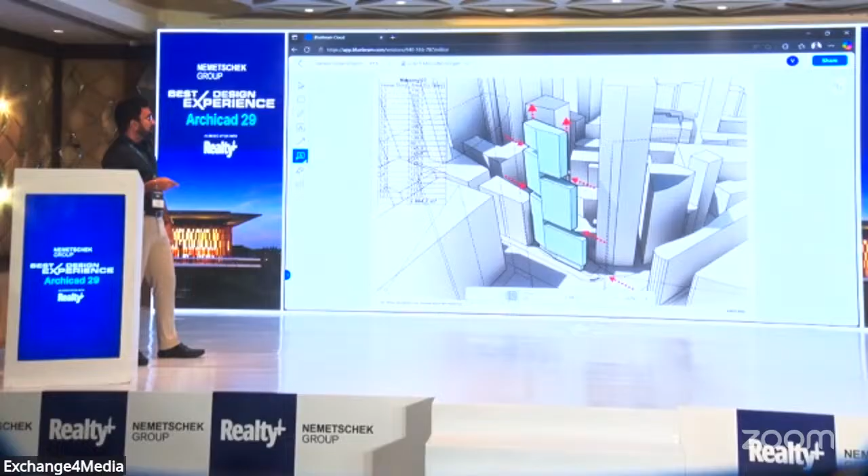You can just open the drawings on Bluebeam Studio in the web browser, and with all these markup tools you can create call outs or labels and so on, which you can import inside Archicad as an issue. Here I'm creating a cloud there.

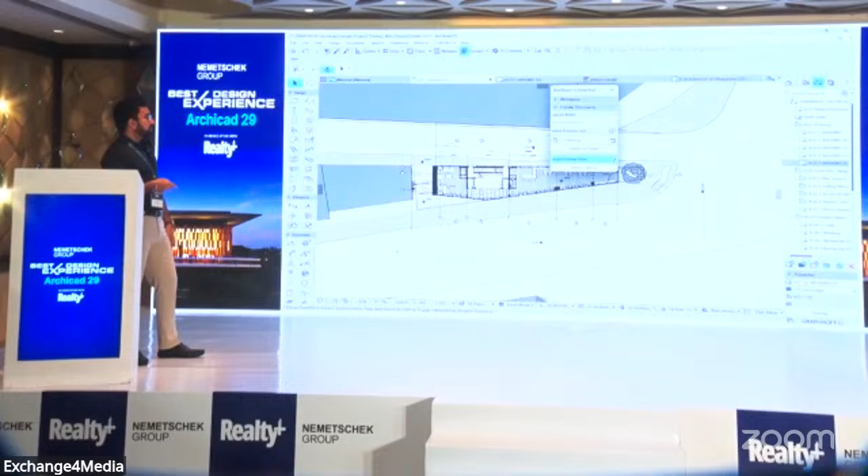Going back inside Archicad, once the markup has been done, you can import the issues from Bluebeam Studio from the respective drawings where they created the issue. Just select the drawing and click import.

You will be able to import all the issues from there, and this will nicely identify which layout this issue is in within Archicad, placing the information there on that layout. You can see it identifies this layout and places the issues inside it.

So the modelers will be able to understand the issue and resolve it. This is 2D based collaboration, so for people who are still using 2D, you can use this workflow to collaborate with them.

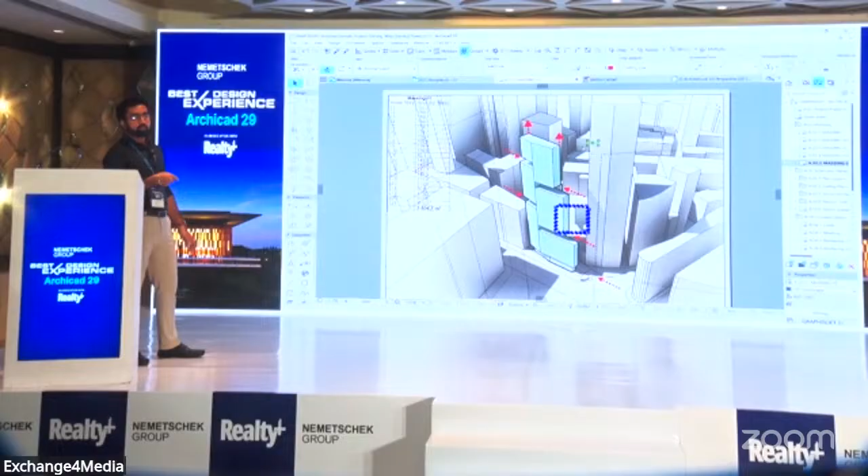Before I conclude this session, I'd like to mention that these are not the only workflows available. We can use multiple other tools to create such digital workflows. If you want to use these workflows on your projects, please feel free to reach out to us. We are happy to help.

Before I pass it back to Swapna, you can see we have an Apple Vision Pro here. Later during the networking session, you can have a look at it and enjoy the virtual reality of your BIM models within this Apple Vision Pro in BIMx. Thank you.

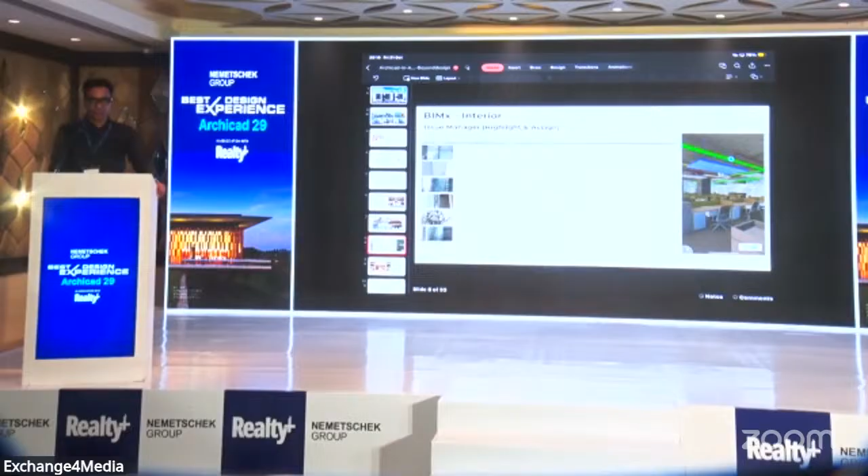In our office, nobody checks the drawings, it's more about checking the design. So if the design is first, the output of documentation is just a byproduct. Communication within the model itself happens.

Visual is very important because whenever we visit the client, we have to give certain options to the client, or debate certain colors, textures, whatever. Within the virtual reality tool, these options are ready. We finalize one option and start working on that particular option right away for the costing and documentation part.

So definitely design options. Now this is going to be... you need to click there.

These are the design options which you can create at the planning stage also. Because we are used to working on a 3D platform, though it is in a plan, we can start feeling the spaces from day one at the plan level also.

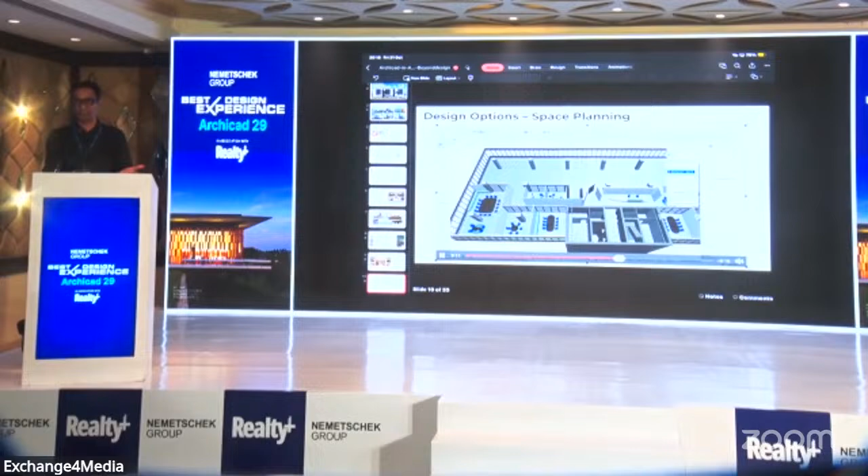Yeah, next. Virtual reality as a tool is definitely an integral part of our workflow.

Almost every project uses this 3D model view at two stages. One is within the office, where all our offices have this particular tool so people can walk through the design, give comments, and improve the design. We also produce a file of this and take it to the client, which helps us for quicker approval.

Next. This is another interesting use of BIM software.

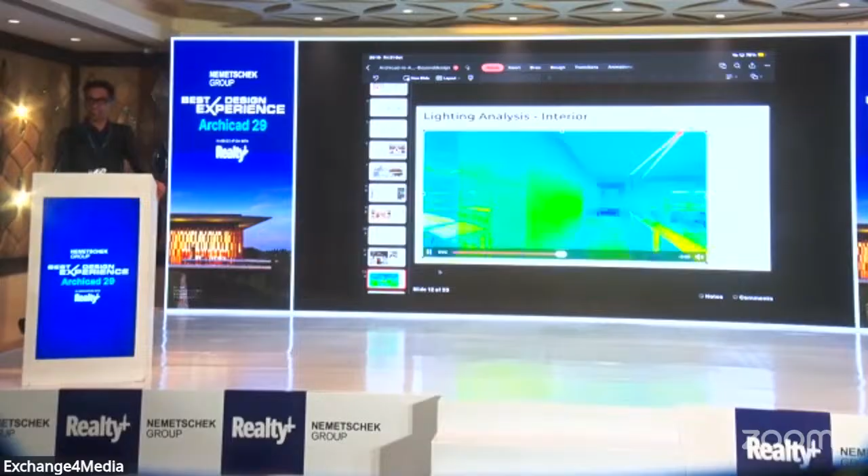In Archicad, when we connect to Enscape and do a lot of lighting work on any project, they have one tool that gives this kind of rendering output. With the help of IES data it has, it helps me understand which area has darker spots or whether uniform lighting is given or not. So this particular tool we use.

Sunpath studies definitely help because in interiors, how much space we have to keep from the glazing side—those things can be decided with the help of these studies.

Everybody talked about design capability, but finally the most important part of our field is costing. What is the project cost? So schedules are very important—quantity takeoffs. Archicad has a really powerful schedule methodology where quantities come very precise.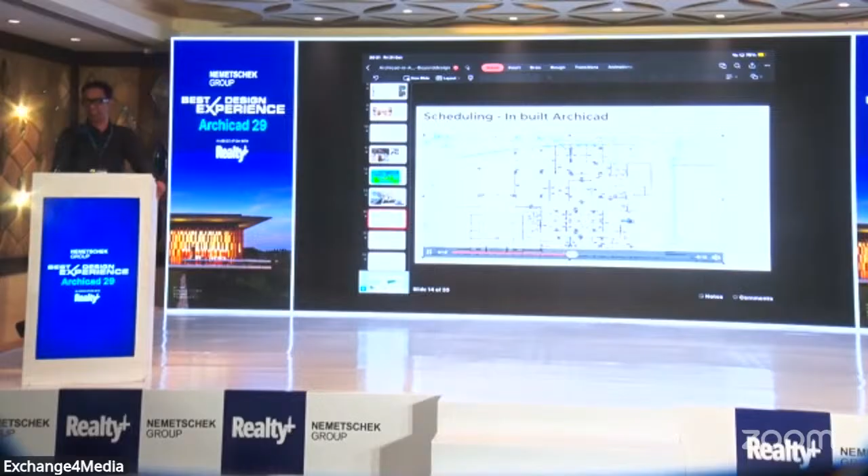We are using built-in tools that Archicad has, but along with that come its own challenges, the speed limitations of that particular tool. So we have developed our own API, and we use that API to do the quantity takeoff and check off the models.

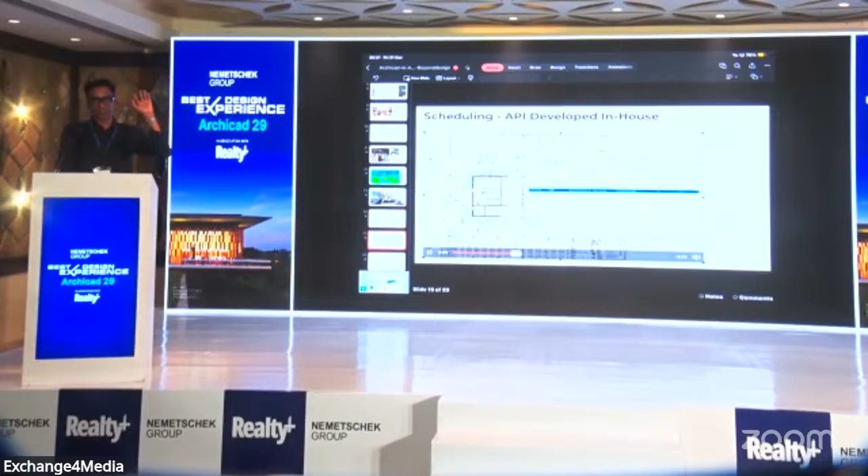This is the tool we've developed where our quantities are pushed onto the cloud. We have an online BOQ tool. Here we complete our model and the bill of quantities gets generated online. My BOQ team works on the specification part, quantities get pushed to the cloud and plugged into the model.

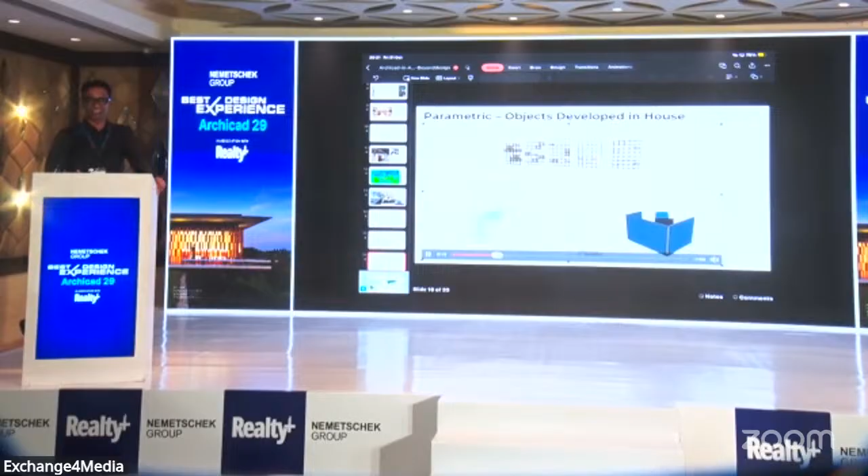The selection tool is much faster now, checking of the model is very fast. Another thing—any BIM software, whether Revit or Archicad—people say the file becomes slow because we get so excited seeing everything in 3D that we try to push each and every element into the model. So it has its own challenges.

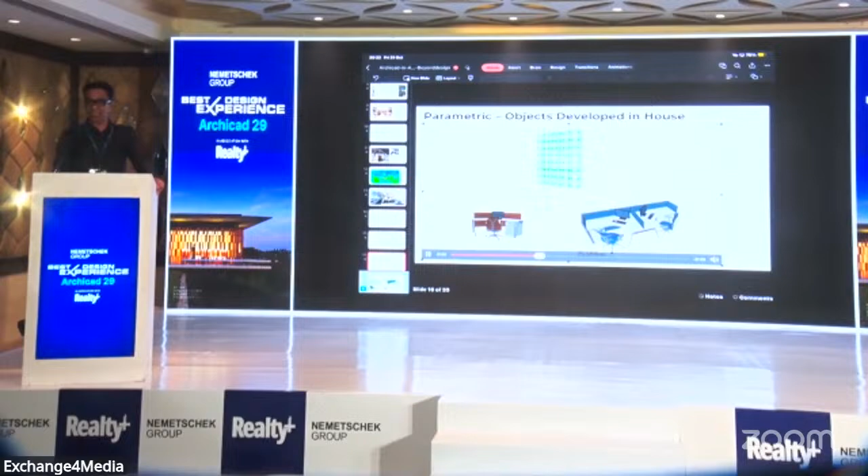We have our internal team who works on quality control of models. We've created our own library of workstations because certain software has limitations in terms of their libraries, so we developed our own. During design collaboration, we never find any limitation of the products coming in.

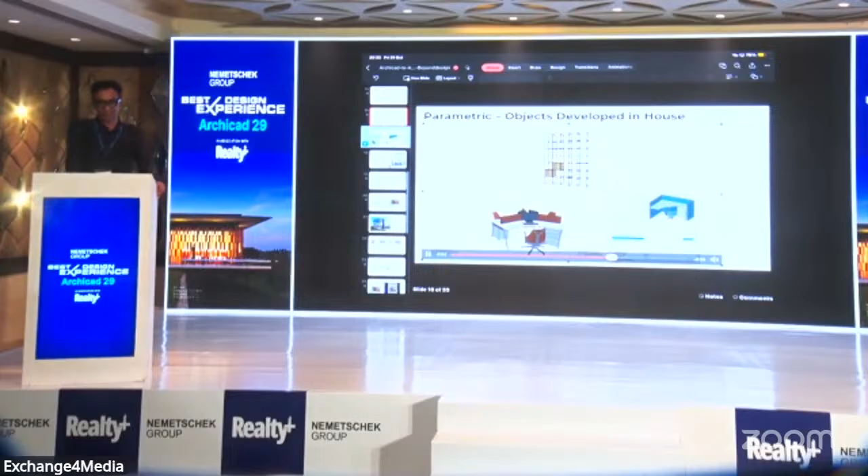These are the challenges we see. Whoever is using a BIM platform, always look at the polygon count—this is just a suggestion.

Over the last 8 years we've gone through this phase where our model used to crash. Now we have a well-experienced team—we have a privilege. One of our members comes from an animation background and knows what low poly modeling is. These are slightly different terms for us too, but these guys can create models where our products still look equally good, but the polygon count is way lesser.

For example, there's a Steelcase chair we'd love to use in our projects. That particular model has a polygon count of 35,000 if picked directly from their website as a Revit family. We have a version of the same chair with just 3,000 polygons.

So we now have a library of around 3,000 to 4,000 objects with us, so that there is no limitation when we are designing.

So in interiors, over the last 8 years, our speed is now at the top level. Same thing now when we do architectural projects—definitely what we need is a single source of model with the documentation, because at the architectural level, documentation is required from day one itself.

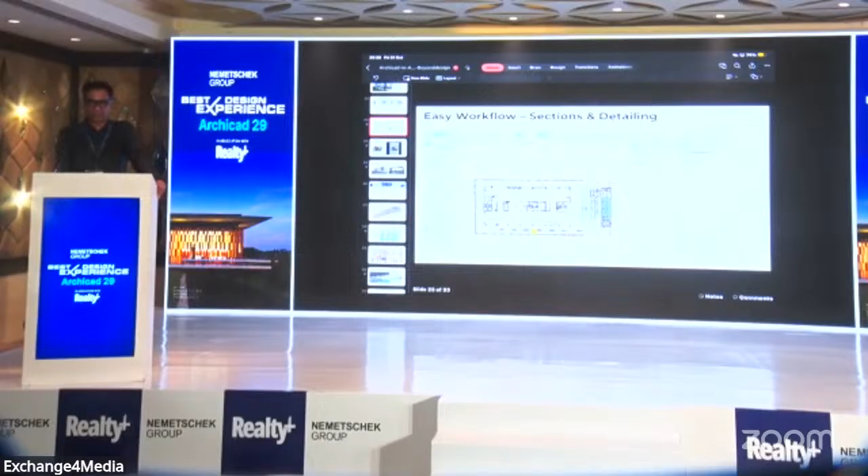Section detailing is a piece of cake now. Everybody is getting used to how important details are, so they go into designing and handle the smallest details from day one itself. Then it's just a matter of how much data I want to show on day one versus day two.

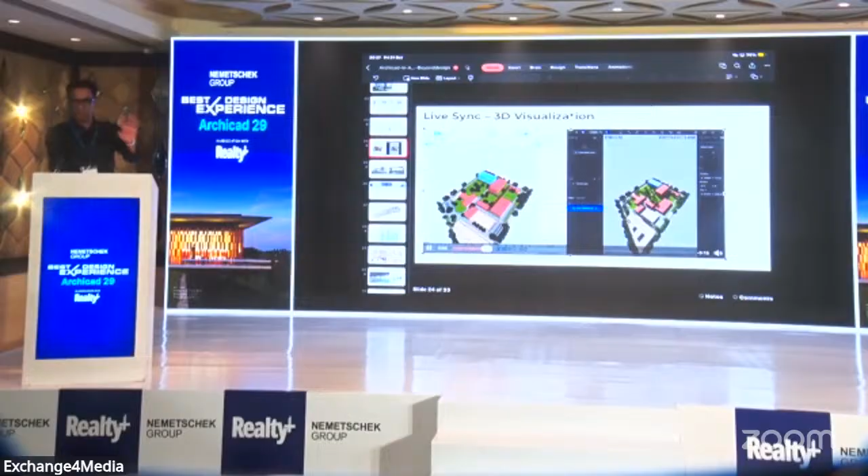Some people work directly only on Archicad. Some team members love to work using the rendering tool next to them, so we have a 2-screen setup, 27 inches. Some people work in this particular setup.

Sunpath study in architecture is most important. This helps because we do architecture and interior of the same spaces. So when we design, we know this data goes to the interior team also, and they start placing their interior things based on the sunpath.

We are also into specialized projects of labs, where again a lot of data is required, a lot of equipment we have to handle in lab projects. So here again, right from the planning, the most important requirement is modularity. Sometime back when healthcare topic was coming up, because there are repetitive elements, data alignment is possible. But in labs, modularity is there, but within the labs every department has too many requirements coming up, down to the smallest requirement of how the equipment has to be placed.

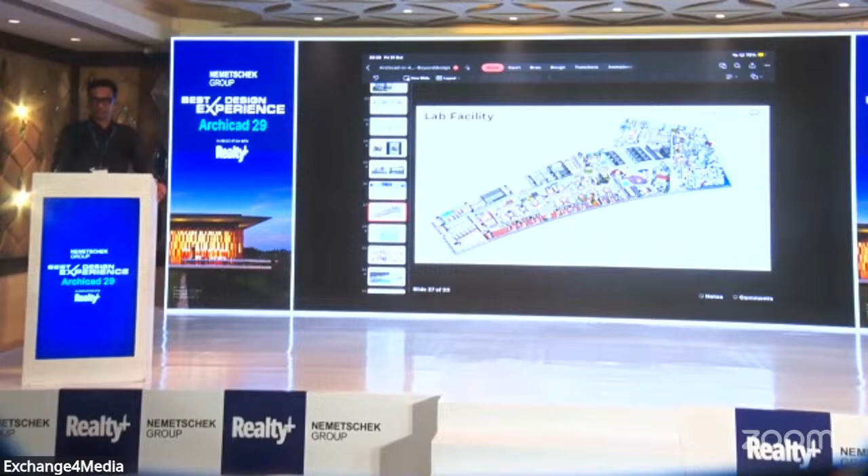So this is one of the lab facilities which we are creating recently. It's an ongoing project. This is the room data sheet which we have created. We attached it to the zones and it created the schedule.

We use this schedule for our checking. Now this is being used by our design team, my site team, my consultants. Everybody is using one sheet. Any changes happen, it gets changed over here.

We have our own CDE platform. Right now we are doing our collaboration using Trimble Connect. The entire consultant team and everybody connect on that platform, and this data gets updated over there. They follow this.

Next, obviously visualization is also an important part over here. Not only here, but whoever works on these projects from the client side, somehow they do not understand much in the plan. So here again, virtual reality with real-time placing of the equipment helps them take faster decisions.

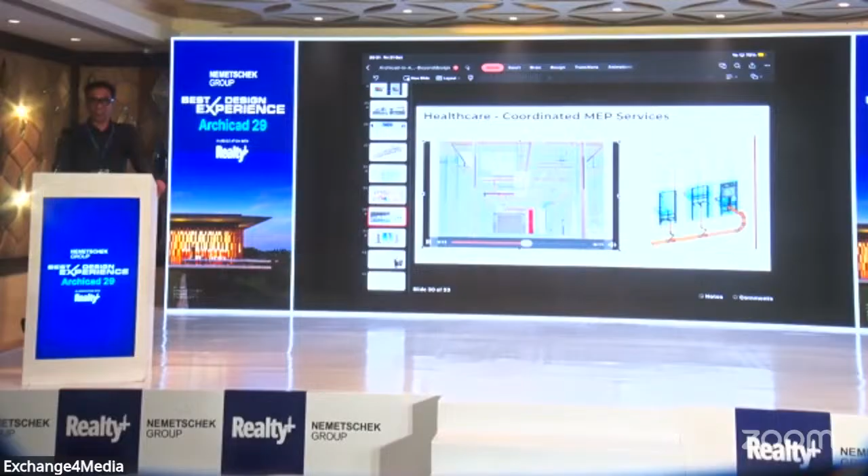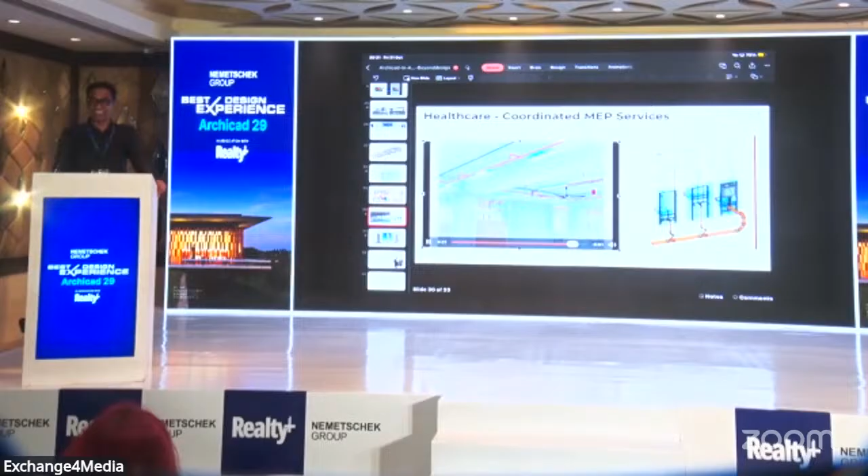Certain details like this we actually work on inside Archicad. Like there is a requirement of drywall partition construction with plumbing coming over there. So these particular equipments, these particular elements, we have to fix. Now as an architect, in a drawing we can show this, but with the help of 3D, my contractor can easily understand this and he can do a better job.

Next, this is one of the 5 lakh square feet projects we had done, where the entire MEP and architecture is done in Archicad. The MEP we had done in AX3000, a CAD-based MEP tool. But again, we follow the OpenBIM platform, so IFC is our core, so we never find any problem integrating anything in it.

So in the last 8 years, if I want to map things, definitely my rework has been reduced considerably. And I can really vouch, because I'm proud of my design directors, they are good at their design, they never change their design. So that means rework happens because of information loss. Now that rework has been reduced.

The approval process from the client is much faster, way faster. And obviously for RFIs, I don't visit my sites much, I visit only once, that's it. So obviously I have more time to design or think of something different. These are really important takeaways for me after using Archicad for the last 8 years.

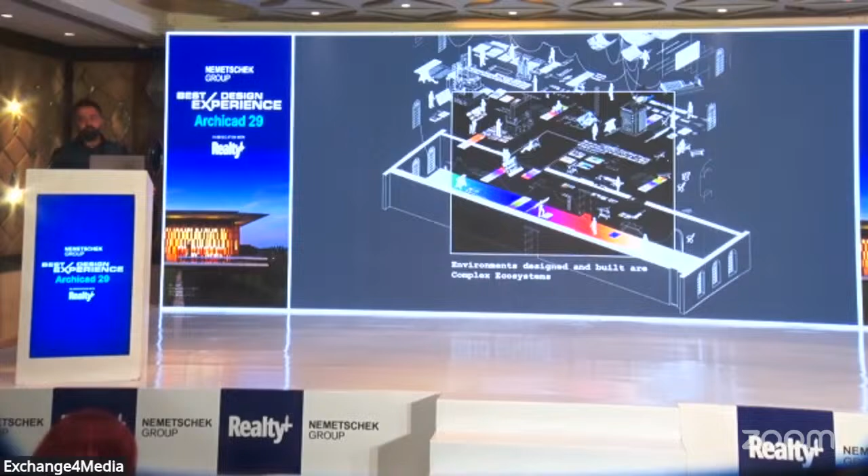Now, when we are talking about complexity, technology is something which comes into the center stage. Technology is something through which we actually see or visualize these complexities with more clarity. And technology is something which kind of helps us or enables us to navigate through all of these multi-layers of system, data and time, one by one as different layers.

And all of this, while you saw a few of the presentations just before this, the digital platform which we are talking about is just a kind of a mirror or a reflection of how our mind is thinking. That's the metaphor I would take. Now, that was a lot of data again for us to decipher.

Now, I'll just quickly talk about how do we see in a lot of projects that we do globally. What are the different forms of how we see or perceive layers coming into play?